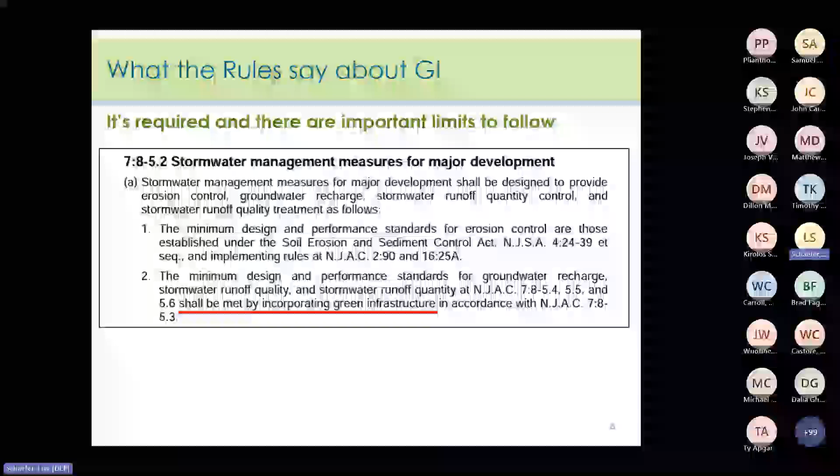All right, so in the rules, we can find the requirement underlined in red on this screen, taken from the rules. All right, the yellow highlighted area right above the red underline. Where is that? Okay, there we go. Says the design and performance standards for groundwater recharge, water quality, and quantity control must be met using GI.

So under item F in this subchapter is where you will find tables 1, 2, and 3, and it is these tables which list BMPs and identify them as either 1, as GI, or 2, as GI requiring a waiver or variance if used for other than quantity control, or 3, as non-GI BMPs. This was covered in Module 1 in our overview presentation. Now, Anthony also touched on this in How to Review a Project Part 1 from Tuesday. The tables have important notes and footnotes that should not be overlooked. And if you need help understanding them, please contact us.

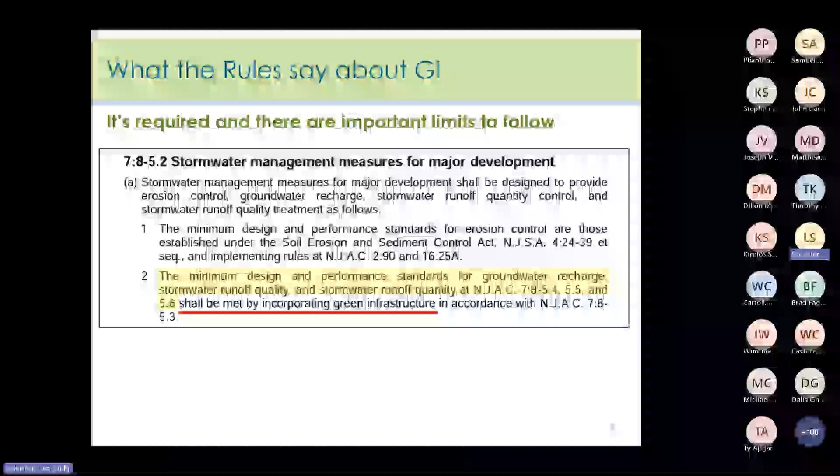So the takeaway from this is that, first of all, the rules require a project meet the design and performance standards using GI. So that means usually Table 1 BMPs will be used as they satisfy all of the requirements. Table 2 BMPs, as we covered earlier, can be used to address stormwater runoff quantity control. When used for the other design and performance standards, Table 2 BMPs require a waiver or variance, and we'll see a refresher on those presented by Manesh in the next presentation. Now, remember, Table 3 BMPs are not GI and therefore will also require a waiver or variance to meet any of the design and performance standards.

So that brings us to the end of item 2 on the slide, which says that GI is to be used in accordance with subchapter 5.3, which I'll discuss next. And it's this section where the rules identify which of the GI BMPs have fixed contributory drainage area limits. Now remember, a contributory drainage area is defined in the rules as the area that drains to a stormwater management measure, excluding the area of the measure itself.

On the fact sheet, below the first paragraph on page 1, these limits are restated. So take note that the GI BMPs found in Chapter 9 of the BMP manual that are not listed here have one or more design components that limit the size of the contributory drainage area. So for example, grass swales have geometric constraints and a maximum depth of flow limitation that is 2 inches. And this design criteria will impact how much of an area can drain to a given grass swale.

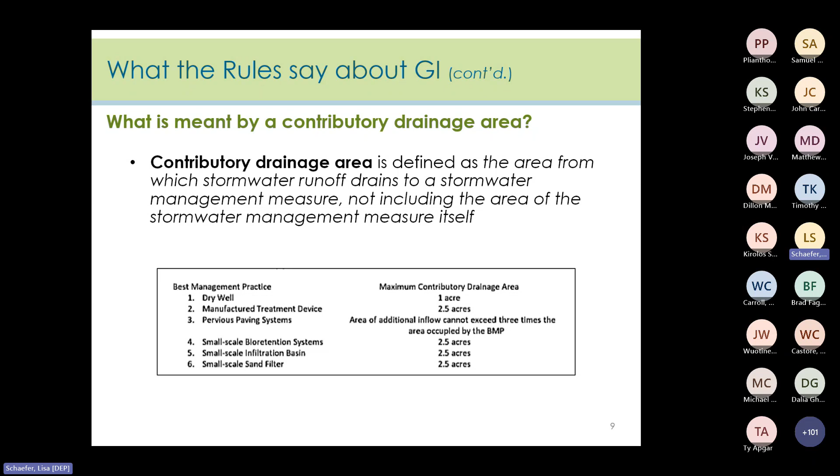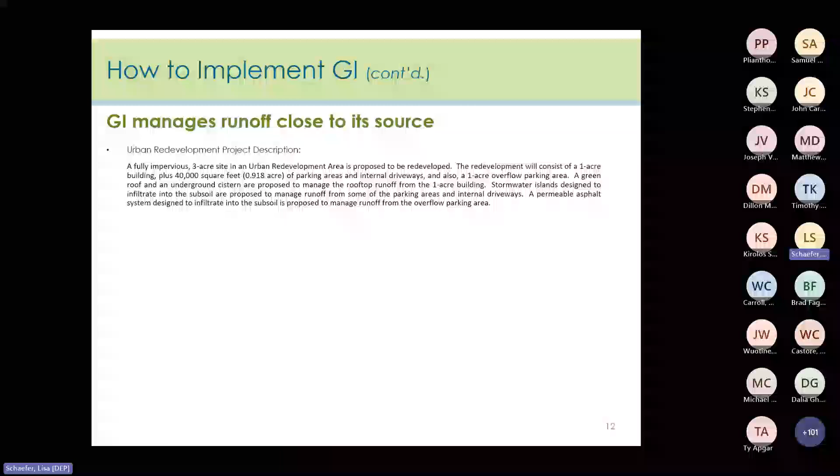Stormwater islands designed to infiltrate into the subsoil are proposed to manage runoff from some of the parking areas and the internal driveways. Also, a permeable asphalt system designed to infiltrate into the subsoil is proposed to manage runoff from the overflow parking area. So here's what that would look like.

The proposed redevelopment is a major development since it disturbs 1 or more acres and therefore is subject to the design and performance standard in the rules. However, because it is an urban redevelopment area and it was previously completely disturbed and was fully impervious, groundwater recharge is not needed. Also, the proposed condition reduces the impervious surface present on the site.

However, due to the proposed GI practices, the project itself breaks up or disconnects the flow of runoff over impervious surfaces and provides low maintenance landscaping that encourages retention and planting of native vegetation and minimizes the use of lawns, fertilizers, and pesticides. So in this example, all stormwater runoff generated by the redevelopment is managed close to its source. So we can answer unequivocally with a yes to the first question on the GI fact sheet.

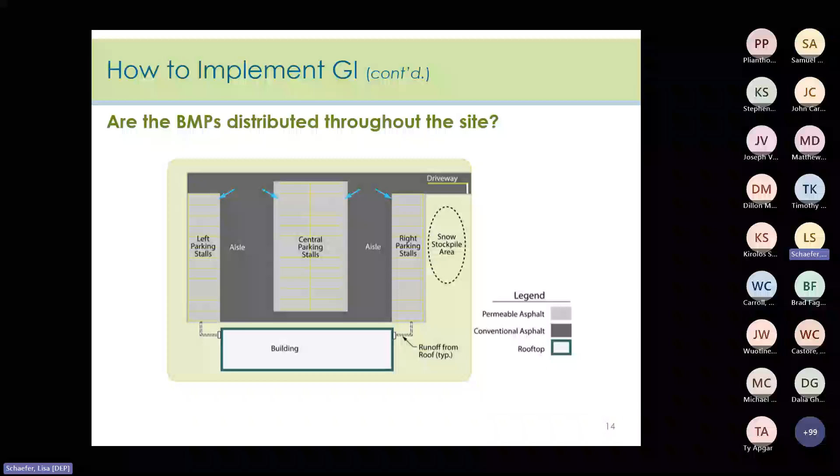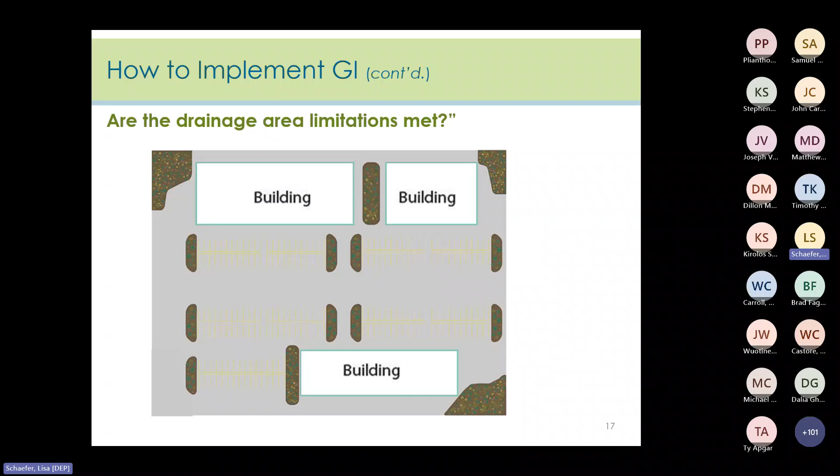So all reviews are going to require figuring out which standards apply and then checking them for compliance. So questions we must ask and answer are, what is the disturbance on site? Does it trigger major development? Will the project be required to do water quantity, groundwater recharge, water quality, and groundwater mounding? We will need to figure out all of that to see if they will apply in this review and how they'll be addressed using green infrastructure as required by the rules.

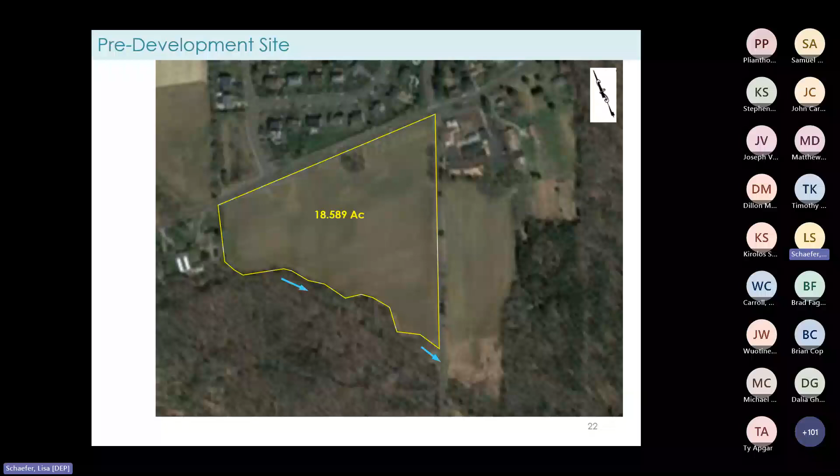The proposed development includes the clearing and grading of the property, construction of 25 single-family homes, widening of the existing road found on the right side of the plan, and another internal roadway. Both roadways will be constructed with 6-inch curbs and will each terminate in a cul-de-sac having a 50-foot radius. The stormwater management report indicated 4.7 acres of impervious cover is proposed, but it didn't have a breakdown dividing it into motor vehicle surface versus rooftop. That breakdown is important with the rule amendments.

I started checking the coverages, and the homes are about 0.35 acres each on average, so that totals up to 8.75 acres. The proposed roadways are 28 feet in width, and by my estimate, that's 70,000 square feet or so, or 1.6 acres of new motor vehicle surface that is proposed. Additionally, the existing portion of the roadway along the east side of the property will be newly collected where no collection system existed before, so it also counts towards the net increase in motor vehicle surface. So clearly these totals exceed the thresholds for major development. So for this project, compliance must be demonstrated with the GI requirement.

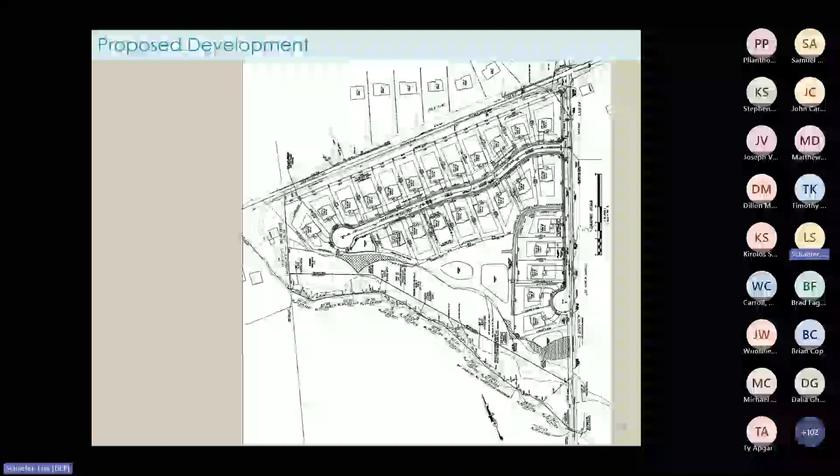We have water quality, stormwater runoff quantity control, groundwater recharge, and if infiltration is proposed, groundwater mounding, plus the safety requirements and of course maintenance. So to address water quality and the GI requirement, 4 small-scale bioretention basins with underdrains are proposed, and here's where they will be located.

But as you know, major development projects are required to use GI best management practices. They are smaller in scale and they treat stormwater runoff close to its source. So it's good that the designers realized the single basin approach would not be compliant, and then they went with multiple BMPs. So the reviewer, of course, would also want to check that for the revised design, the proper number of test pits and soil borings were performed.

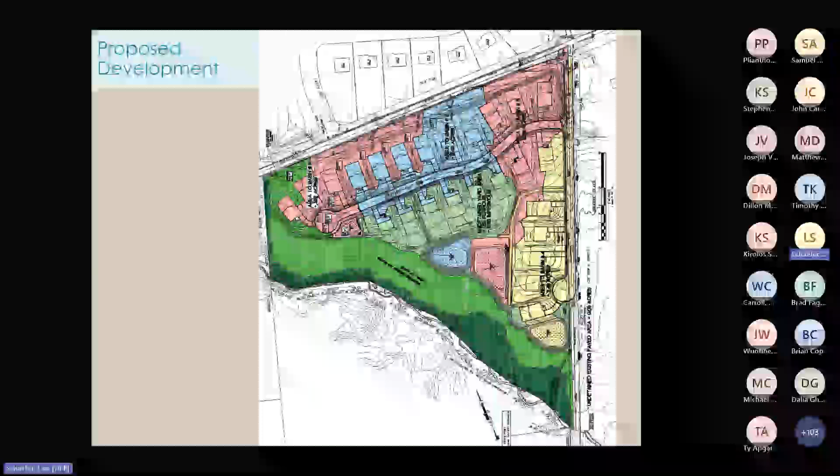So even though the drainage areas are below the contributory limit, none of the BMPs reported as being GI BMPs are close to the source of runoff, nor are they distributed throughout the site. So this layout alone does not meet the GI requirements. Lastly, there's a lighter green area in the center that has roof area generated runoff. It's not detained, so that will be an issue when we address how the site complies with the quantity control design and performance standards. So we know that the design does not meet the requirement to use GI, so we're going to call that strike 1.

Let's take a look at other instances in which the project does not comply with the rules. So here's a basin section detail. The details for each of the BMPs otherwise show most of the requirements for online bioretention systems with underdrains with weirs and orifices to attenuate discharge from the larger design storm. Well, so far, so good.

However, I didn't see the bioretention media specification, so that would definitely be something to add in my review letter. I also didn't see a maintenance plan, so without these 2 items, the BMPs don't merit their TSS removal rating. So that means they don't meet the water quality standard. And this would also go into the review letter, and we'll call that strike 2.

So interestingly, the stormwater calculations that were prepared earlier in 2022 used the Type III storm distribution for the 2, 10, and 100-year design storms. But as per the 2021 publication of Chapter 5, NOAA C and NOAA D distributions are now used.

So that would also go in the review letter and new calculations would be required. So far, it's not looking so good for meeting the runoff quantity control standard. So for now, I'm going to mark that also as non-compliant.

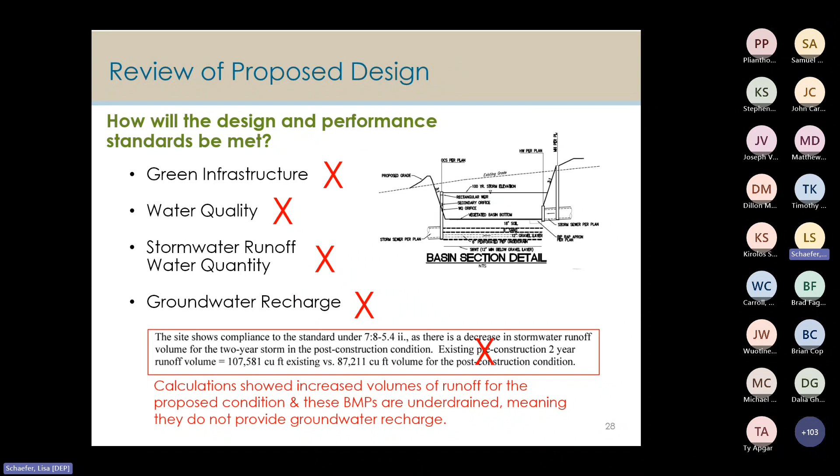So let's see, what did we cover today? We covered what we mean by green infrastructure, which we abbreviate as GI, and that is a stormwater management measure that manages stormwater runoff close to its source by treating stormwater runoff through infiltration into the subsoil, or treating stormwater runoff through filtration by vegetation or soil, or storing stormwater runoff for reuse. The fact sheet was created to help the public better understand GI and how to implement it, along with examples of clustering BMPs that are not considered green infrastructure.

Now, to address water quality, groundwater recharge, and runoff quantity control, the rules require green infrastructure be used, and by that I mean used correctly. So answering 3 questions when you review a design will check if the GI is properly implemented on a site, meaning the GI BMPs are located close to the source of runoff, they are dispersed throughout the site, and the drainage area limitations are met. So I hope that you found the example enlightening, and I hope that you will think about how GI can fit into your particular location.

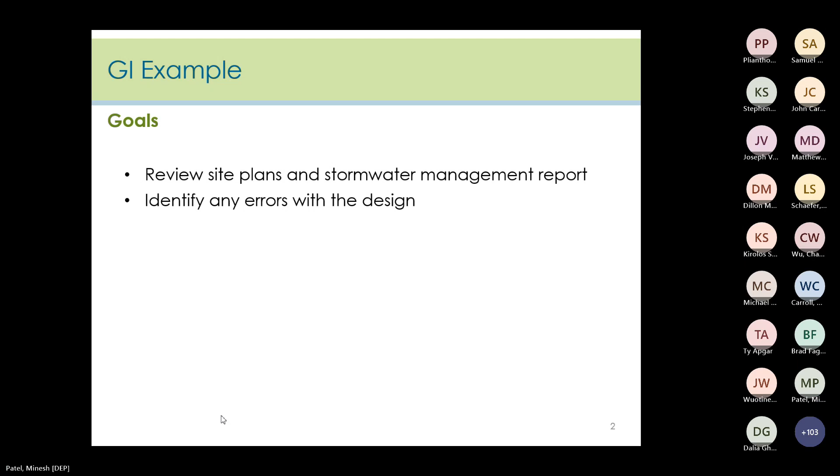We're just going to get right into plan review example number 2. So the goals of this presentation are the same as those for the prior example. We will focus on whether the project meets the requirements for green infrastructure, and we'll look at what was proposed and identify where the design falls short. So let's take a look at what's going on in our example. We'll start with what the site looks like, what the pre-construction conditions are, and what the existing land cover is.

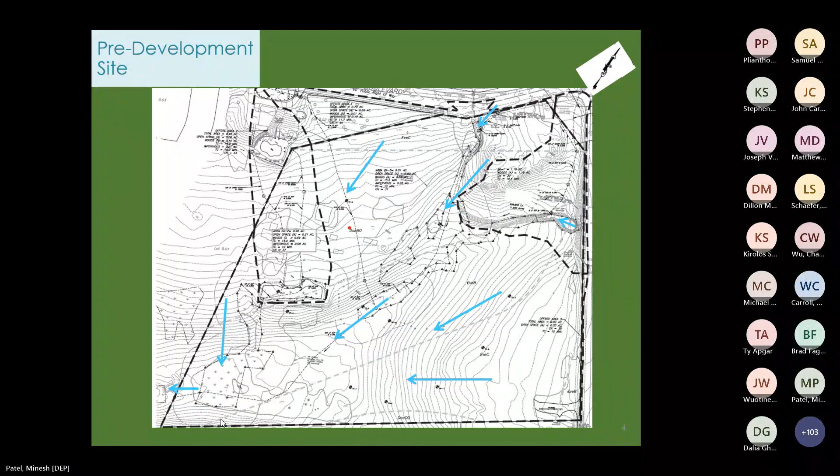The proposed development includes the clearing and grading of the property. There will be a construction of 152 age-restricted affordable housing units in a single multi-story building, a single access driveway, a surface level parking, and multiple stormwater basins that will discharge to the southwest corner of the property to support the existing drainage patterns. The project will be constructed in 2 phases.

The first will include 84 units, and the second will be 68 units, which are located on the left side of the building as shown. From the stormwater management report, the narrative states there are 3 small-scale infiltration basins along the southern border that are designed to provide extended detention of the larger storm designs, plus a northeast detention basin for the off-site runoff entering the site to the north and east.

So immediately there's a big issue with this design. All 3 of the basins that are proposed to meet the green infrastructure requirement, they're all grouped at the southern side of the project. So clustering these BMPs together is not compliant with the green infrastructure requirement. Remember, the BMPs have to be distributed throughout the site and manage stormwater close to its source. The proposed design is going to rely upon infiltration of runoff to meet the groundwater recharge requirement and water quality.

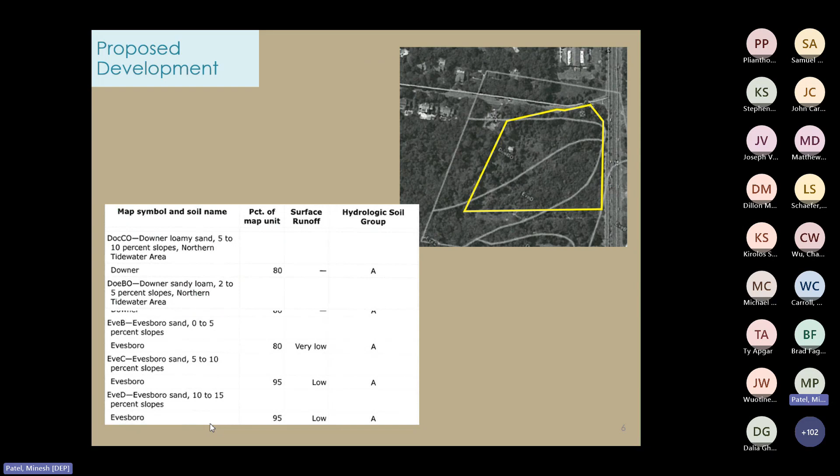Let's look at the web soil survey next, followed by the soil testing data before we evaluate the overall design a little further. So as you see here from the soil survey, the site is mapped as HSG A, which is promising for infiltration. So let's look at the soil testing findings next. 2 sets of soil investigations were conducted. A total of 20 test pits were performed. The first group, shown in green, are from April 2021, and the second group, shown in blue, are from January 2022.

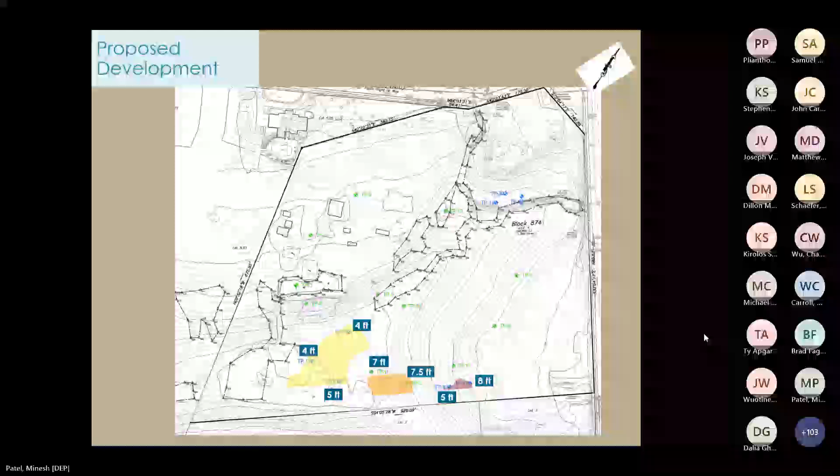So I've superimposed the 3 proposed small-scale infiltration basins onto the soil testing map just to show which test pits correspond to the respective basins. Your review would also include a check of whether a sufficient number of test pits and soil borings were performed, along with the depth of the investigation, which I'm not going to be covering here because we're really going to be focusing on the green infrastructure aspect. I've also added the depth at which the logs show the soil permeability was determined, taking note that groundwater was not encountered at any of these locations.

The brown shaded rectangles denote results for other test pits, and for test pit number 3 and 5, groundwater was encountered at 5.5 feet below existing grade. For test pit 6, groundwater was encountered at 6 feet below grade. And lastly, a perched water table was found for test pit 8 at 10 feet below grade. As with the blue shaded test pits, groundwater was not encountered at the ones that I did not call out. So the report shows quite a variation in the test results for permeability. So let's look at the table of the testing results.

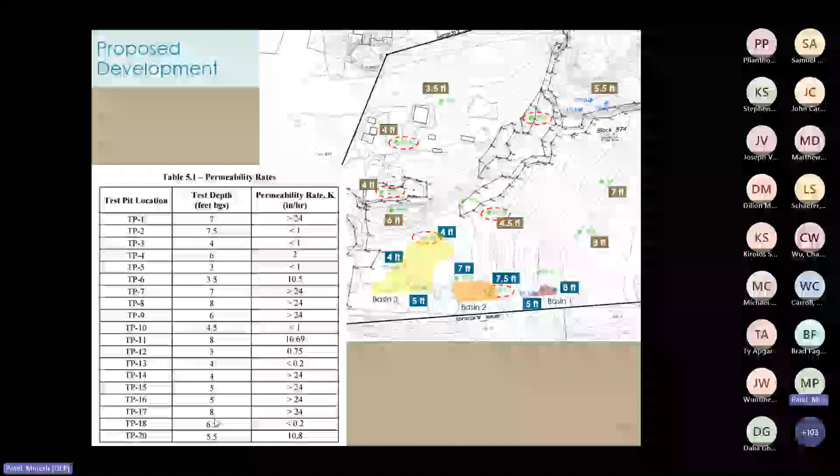So here's that table, and I've circled the locations where the field tested permeabilities were less than 1 inch per hour. Unless soil replacement is proposed, these locations are not really suitable for infiltration types of BMPs. So given the low permeabilities at the encircled test pits, we will have a problem with the ability of the orange and yellow shaded basins to drain properly, and we'll add this to the review letter. So next, let's look at information found in the stormwater report, which states the 3 basins are designed as small-scale infiltration basins, but we really have to check if they are.

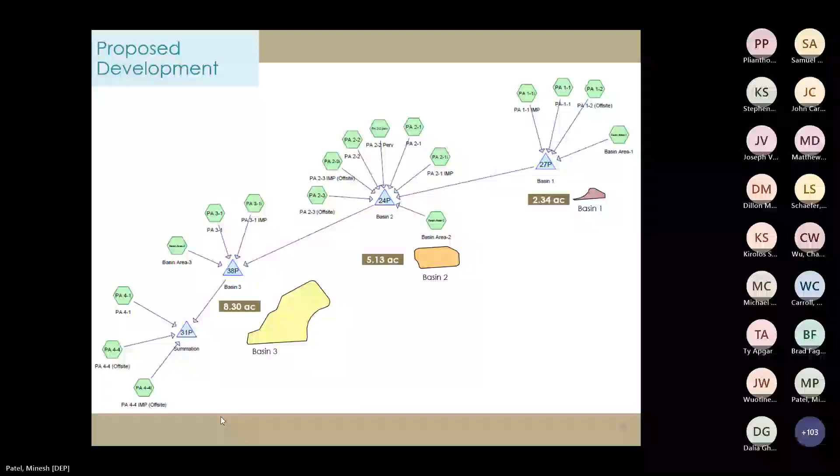So before we dive into the construction details, I just want to say that I'm not including further review information for quantity control and groundwater recharge. For the required groundwater mounding analysis for infiltration BMPs, the only analysis was for basin 1, and the most restrictive hydraulic conductivity with the factor of safety was not used in the calculations. So this could also be in the review letter.

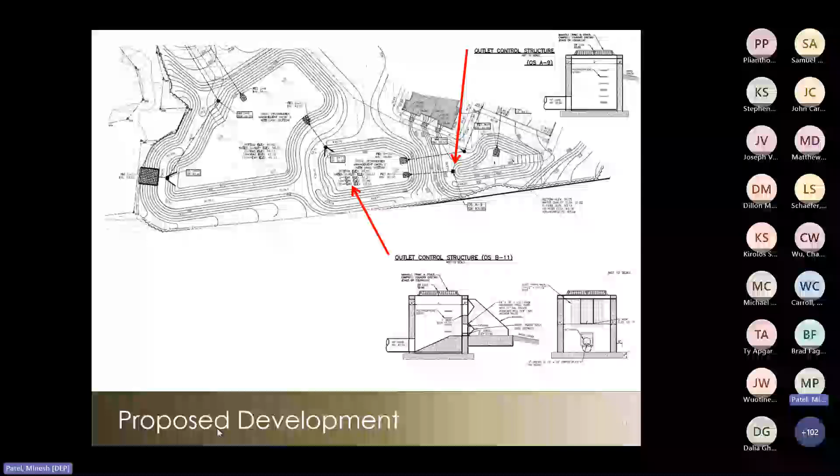And if you look at the detail, the lowest orifice has an invert of 50, which is below the water surface elevation of the water quality design storm that's contributory to basin 2. So basin 2 wouldn't meet the design criteria for infiltration basins according to our BMP manual. And then similarly, the lowest orifice at OS C-10 is below the water surface elevation of the water quality design storm.

So in conclusion, basins 2 and 3 do not meet the design criteria for infiltration basins according to the BMP manual and will not merit the 80% TSS removal rating. These contributory drainage areas would most likely be larger than the ones that you would find in Table 5.1. They would then be more suited for those in Table 5.3, which would require a variance before they can be used for quality and recharge.

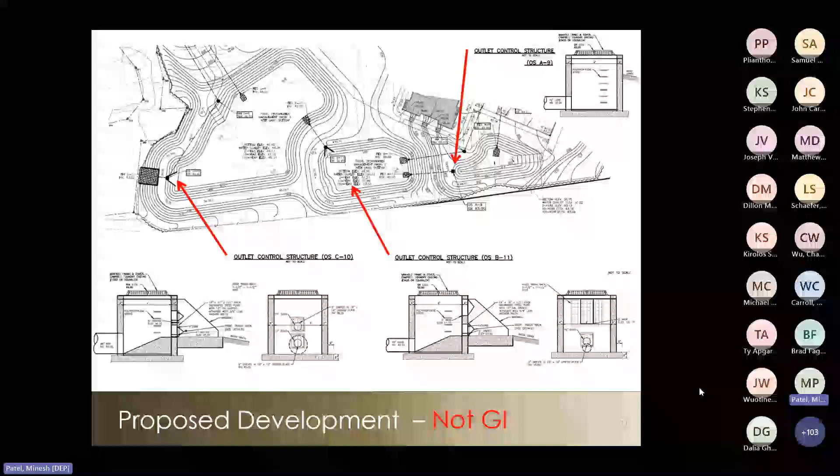Waivers are for the enlargement of an existing public roadway or railroad or the construction or expansion of a public pedestrian access, which this project is not. So the next slide will revisit the subject of variances. There are strict standards to be met in order to grant a variance, as we've discussed. More specifically, the municipality has to have a mitigation plan in place that identifies what measures are necessary, potential mitigation projects, and/or criteria to evaluate mitigation projects that can be used to offset the deficit created by granting a variance.

Additionally, the conditions that are shown here, in part from the rules, must be met. The applicant has to demonstrate it is technically impracticable to meet one or more design and performance standards on site. And those reasons can only be engineering, environmental, or safety-based. Furthermore, the variance cannot be for the entire site unless an analysis is provided for each drainage area within the site. The applicant also has to demonstrate maximum possible compliance is provided by the design. Don't forget, there's also a reporting requirement for variances.

What's not shown in this excerpt is item 3, which is about the mitigation plan, which has to be within the same HUC 14 and approved no later than the preliminary or final site plan of the project. Moreover, if the variance is for green infrastructure, then the mitigation plan must use green infrastructure BMPs to manage an equivalent or greater area of motor vehicle surface. There are 7 other parts to the mitigation plan from this section of the rules that I've not covered here. But in short, a municipality cannot grant a variance now like it may have done in the past. Since information was also not provided on mitigation projects, this project is not compliant with the rules.

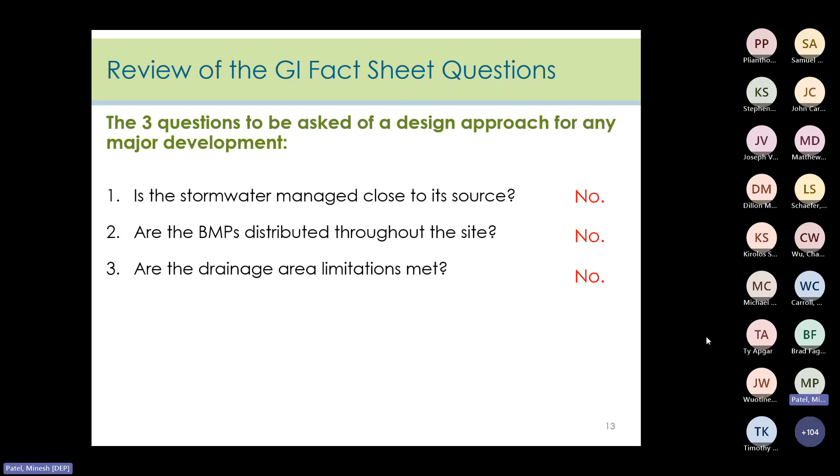So to wrap things up, this project does not comply with the requirements to use green infrastructure to meet the design and performance standards for water quality, groundwater recharge, and stormwater runoff quantity control.

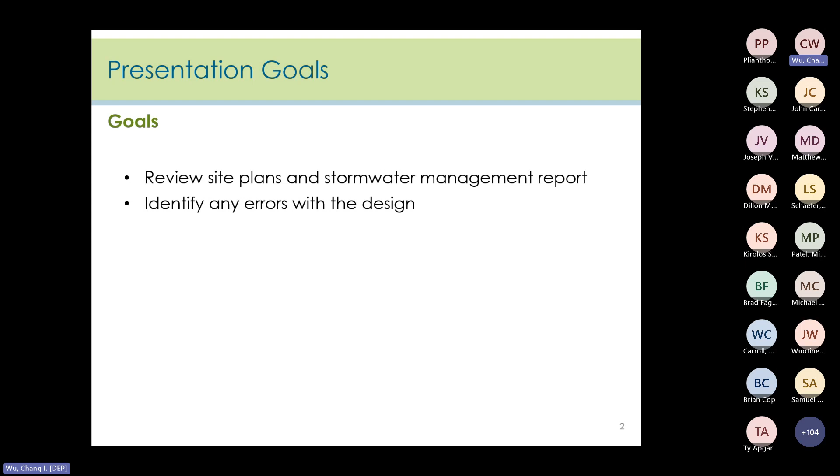Good afternoon, everyone. This is Chang Wu. I'm going to present the third example from the project that we saw in our MS4 audit program. So the goal of the review for stormwater management project is to review the site plan and the stormwater management report, and also identify any errors with the design.

So first thing to ask is, is this project a major development or not a major development? So you have to look into the municipality's stormwater control ordinance. And for this project, the municipality adopted the SCO pursuant to the stormwater management rule adopted on March 2nd, 2020, which is what we call the GI rules.

And under the GI rules, the definition of major development is a disturbance of 1 or more acres of land, or an increase of a quarter acre of regulated impervious surface, or regulated motor vehicle surface. So in order to check the disturbance, the increased regulated motor vehicle surface and the regulated impervious surface, we need to check the land covers of the pre-construction condition and the proposed conditions and the scope of disturbance.

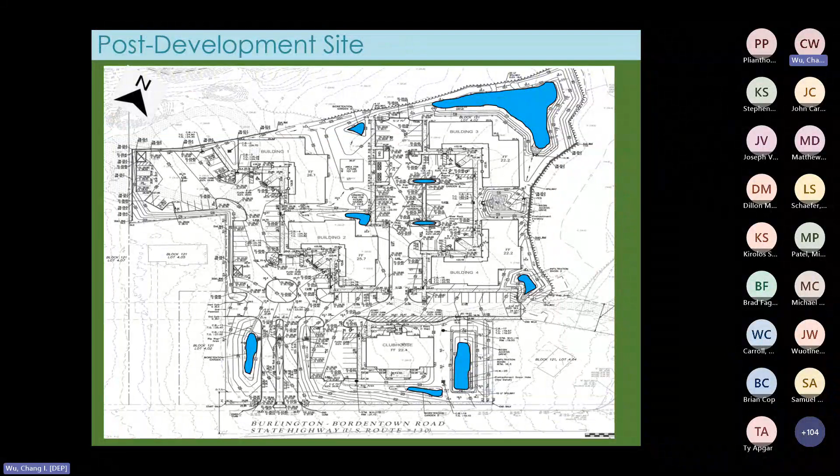So let's take a look at the site plan. You can see that it's a development that has a lot of disturbance and also impervious and motor vehicle surface. So let's take a look at the existing conditions. For the existing conditions, we have to check the 5 years from the day they submit the application and see whether within the 5 years there's a land cover change, whether there's a land cover that would have the least potential to generate runoff.

This project was submitted in 2021. So we look back, there's an aerial photo available in 2015, and from the aerial photos, we can see that there's no land cover change during the past 5 years. So we can assume that the land cover shown on the site plan survey and also on the aerial photos shows the project site. The major land cover is wooded area and has some impervious surface.

So compare the pre and the post construction condition. We definitely know that this project would disturb more than 1 acre, and also would have more than a quarter acre of regulated motor vehicle surface and regulated impervious surface. So this project meets the definition of major development.

So when a project is a major development, we have to look into the standards. The first one is water quantity. So definitely this project needs to meet the water quantity standards. The second one is water quality. You can see that the project has an increase in regulated motor vehicle surface greater than a quarter acre, so it is required. And since the project has a huge coverage of impervious surface, definitely groundwater recharge is required.

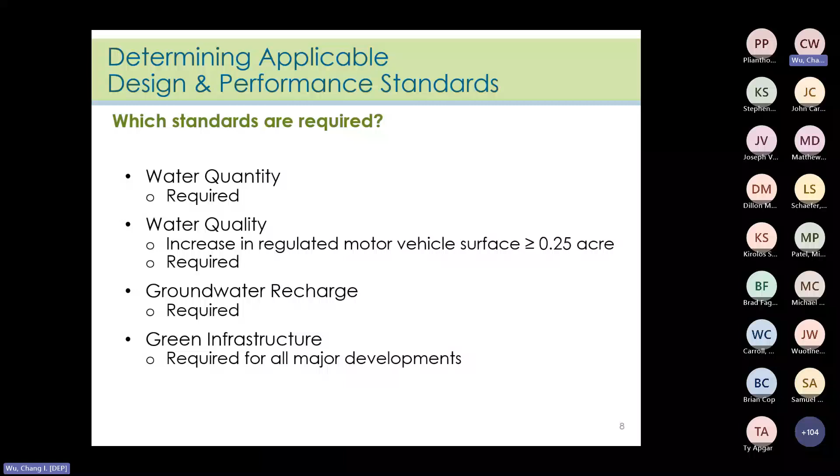In accordance with the rules and our SCO, GI BMPs are required unless a variance from strict compliance with the SCO is granted. Especially, small-scale GI BMPs have to be incorporated to comply with the stormwater runoff quality and groundwater recharge design. We can see that infiltration 4 has a contributory drainage area greater than 2.5 acres. So infiltration 4 is not a small-scale GI BMP. So this project does not meet the GI rules.

And next one, we want to look at whether the proposed GI BMP is close to its source. You can see that from the site plan, the blue highlighted area is the proposed GI BMPs. But you can see that on the upper left corner, the area has substantial impervious surface and motor vehicle surface, but there's no proposed small-scale GI BMP allocated on the area.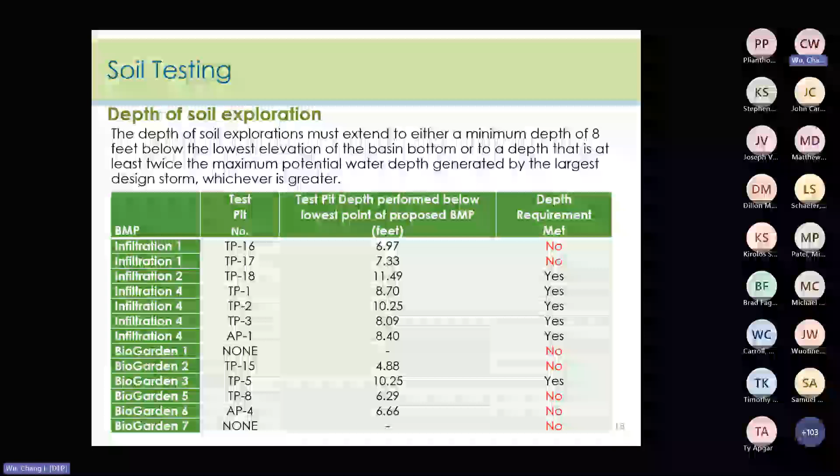After we review the number of soil explorations and also the locations of the soil testing, the next topic to discuss in the soil testing is the depth of the soil exploration, whether it meets the depth requirements. I think you already learned about the depth, so I'm not going to repeat it. And from our review, there are a couple of soil explorations that don't meet the depth requirements.

The next topic to review is the saturated soil hydraulic conductivity rate testing and also the seasonal high water table. So here's one example. We do see they have the soil profile pit, the soil profile log, and also the description of the soil morphology in the submitted soil report. So here are two examples.

One example is infiltration 4, where they identified the redoximorphic features at 32 inches below the ground level, and also a water table was encountered at 50 inches below the ground level. Since the seasonal high water table is higher than the observed water table, 32 inches below the ground is recognized as the depth of the seasonal high water table.

So this seasonal high water table will be used to check whether there is sufficient separation of the seasonal high water table from the lowest point of the BMP. As shown in the detailed site plan, the profile of the BMP, you can see that it has sufficient seasonal high water table separation.

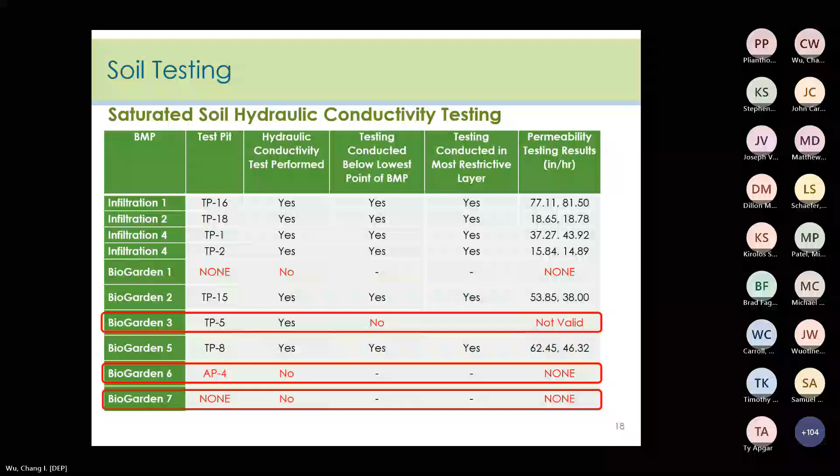After we review the soil information, we understand what the site looks like. Next we move to whether the site meets the water quantity requirements. The first thing to check is whether the routing calculation uses the correct rainfall distribution, rainfall depth, and dimensionless unit hydrograph. This site is located in the coastal plain and in region C of the NOAA rainfall distribution, so the rainfall distribution should use type C, and the DUH should use the Delmarva. For rainfall depth, they used the county average 24-hour rainfall. That's acceptable.

Since this project was submitted to the township, and the township adopted ordinance only includes the rule amendments up to March 3rd, 2020, this project doesn't have to use the projected future rainfall in the design, as the current rule requires.

In the quantity standard review, we check whether the CN number is correct. In this case, the design report used HSG B in the routing calculation, which is wrong, and that affects the selection of the CN number. The default HSG A soil should be used, so the CN number should be chosen from A soil. For post-construction, the default soil should be D soil, so the CN number should be chosen from D soil.

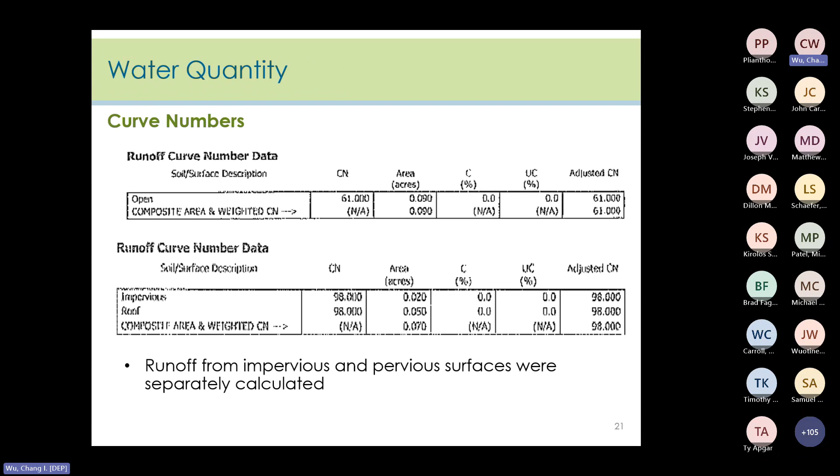So we take a look at the aerial photos and the proposed site plan. We can see that, yeah, bioretention basin one will take the runoff from pervious land cover, so the assumption of T sub C is correct.

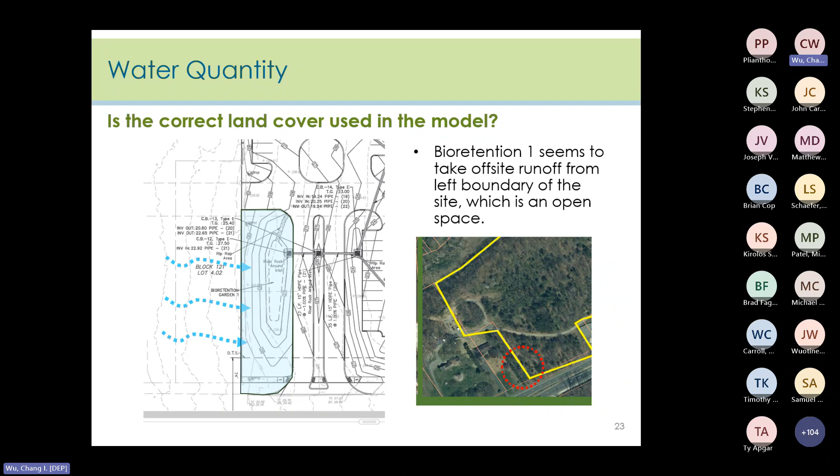And another thing we want to check is the water quantity. For the exfiltration, if they use exfiltration in their routing calculation, use of exfiltration in a small-scale GI BMP is allowed, but subject to some conditions. So here is a brief of the conditions. Exfiltration can be used in small-scale GI BMPs only if the soil testing fully complies with Chapter 12. The design of the BMP must comply with all the criteria in Chapter 9.

Pre-treatment is required for contributory drainage area greater than 1 acre. Exfiltration cannot be used in any BMP design with an underdrain system. So let's take a look at one example of this. Sorry, there's a typo on the slide. If you have the handout, the drainage area in the handout is 2.71 acres. Actually, it should be 2.17. So let's take a look.

Infiltration 1, the soil testing, as we saw from the soil report, is valid. And the drainage area is 2.17 acres, so pre-treatment is required. And we can see that they do have a pre-treatment. And this infiltration 1 infiltrates into subsoil. So exfiltration for this proposed infiltration 1 can be used in the routing calculation.

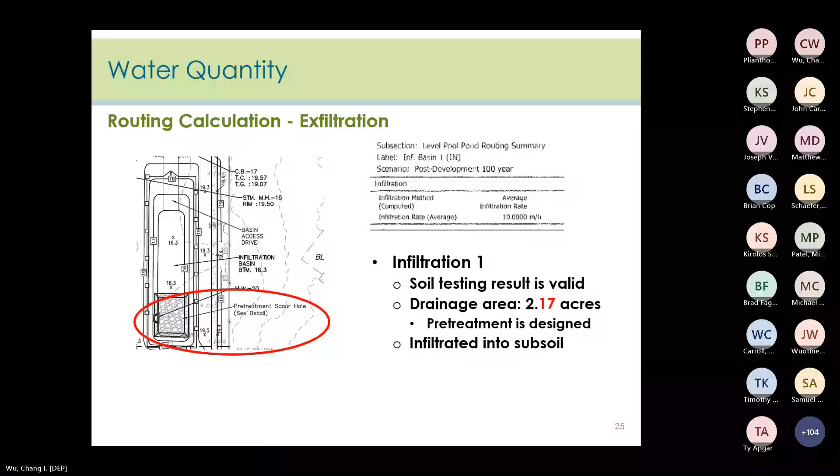And also we reviewed all the other proposed BMPs, and we found some issues. Here is a summary of those issues. Infiltration 4 is not a small-scale GI BMP because it exceeds 2.5 acres of drainage area, so it cannot use exfiltration in the routing calculation. Bio gardens 1, 3, 6, 7 do not have valid permeability test results, so they cannot use exfiltration in the routing.

And because they cannot use the exfiltration, the volume and the water level would have to be revised. So the outlet, everything, should be adjusted based on the routing calculation without exfiltration. Or alternatively, they can go back to do soil testing, get valid soil results, and also modify the drainage area so they can continue to use exfiltration in the routing calculation.

And the other issue, also associated with the soil, is that the routing calculations are based on HSG B soil where the soil is urban land cover without any HSG designation. So the default HSG A soil in the pre-construction and default D soil in the post-construction should be used. As we said in the previous slide, that would overestimate the pre-construction peak flow rate and underestimate the post-construction peak flow rate. So the table we found in the report saying that they meet the reduction requirement would be questionable. If you have a situation like this in your review, you should ask the design engineer to revise the report and do the reduction rate calculation again.

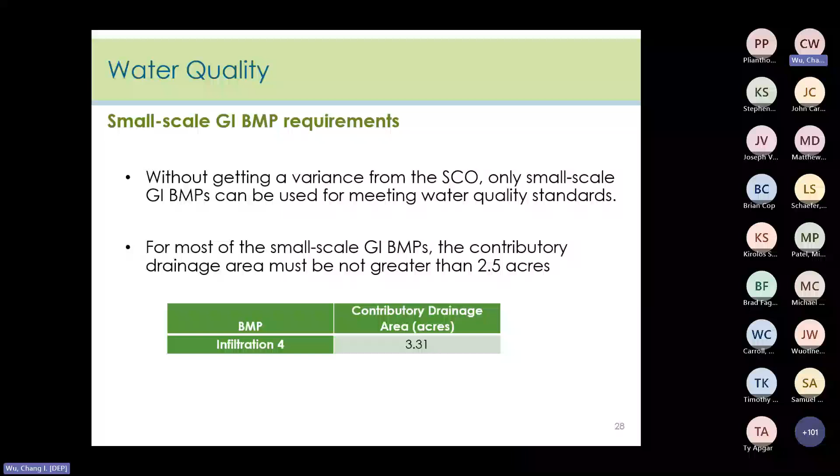And the second issue we want to address is that the proposed water quality BMP should treat the entire water quality design storm runoff in the BMP. That's in our rules and also in the township SCO. So let's take a look at their proposed BMP. Here, it may not be that obvious to you, but from our review, it shows that bio gardens 6 and 7 do not contain the water quality runoff volume.

And also, we want to check the BMP design, whether the configuration of the proposed BMPs meets the design criteria in our BMP Chapter 9. As the previous slide shows, there are some BMPs that do not have valid soil exploration to determine the seasonal high water table and the saturated soil hydraulic conductivity rate. So the separation from the water table and the drain time may not be verified.

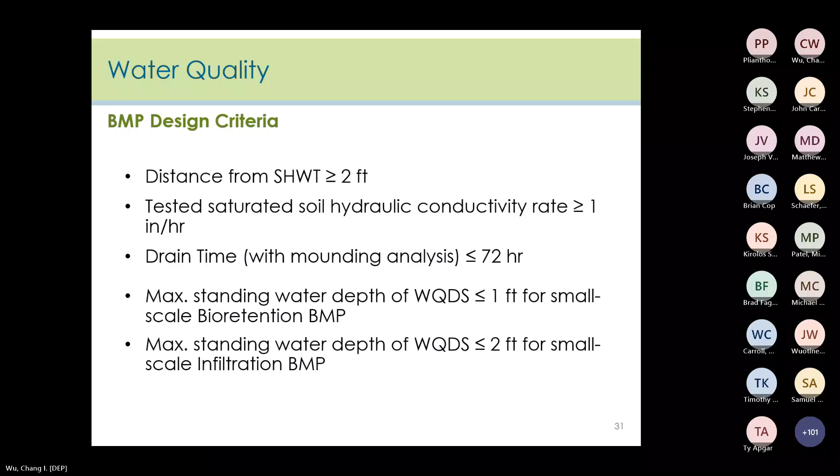And also, for the bioretention system, there are requirements for the soil bed, for the media, and also here's a requirement from the BMP. So you will take a look at the profile view of the site plan to see whether the site plan does show those requirements for the planting bed. And for this project, it does show that.

Then for the infiltration BMP, the soil layer also has requirements. So same thing, you have to check the detailed drawing of the profile of each proposed infiltration BMP, and check whether they have those notations in the notes in the site plan that meet the requirements.

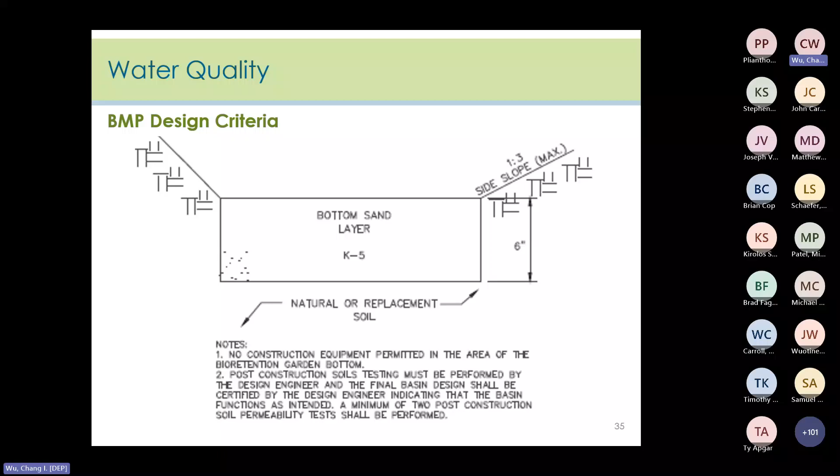And also here are the screenshots from the site plan. They do mention the construction without compaction, and all those requirements required in the design criteria from Chapter 9. So those are the details you want to review when you examine the site plan.

After the quantity, the next topic to be reviewed is the groundwater recharge. This project proposed to infiltrate the difference of the 2-year storm. Although it's simple, from the soil testing we know that they did not use the correct hydrologic soil group in the design. So the volume would not be correct. So they will have to correct the report, use the corrected HSG to calculate the volume, and revise the report accordingly.

And because those proposed BMPs infiltrate runoff into subsoil, groundwater mounding analysis is required. So here are the screenshots from their report with those numbers. Their estimate of the mounding height is 4.637 feet. And on the right-hand side are the highlights of their input. So we would also like to review whether those inputs are correct.

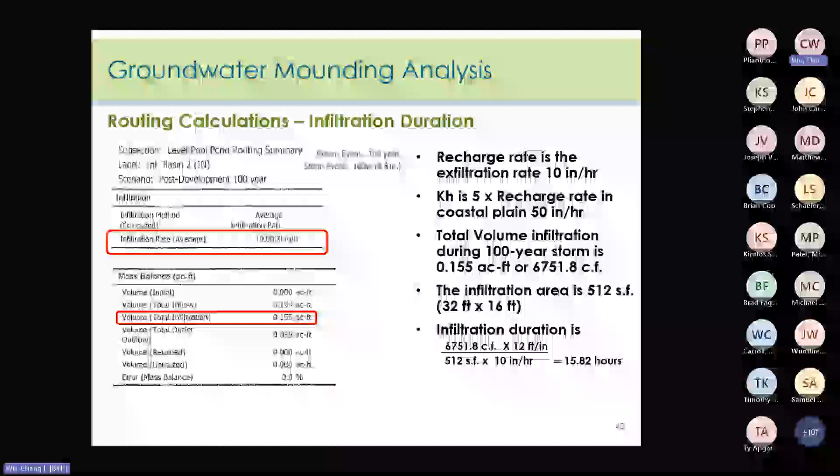And the total volume infiltrated during the 100-year storm is 0.155 acre-feet. So from that, you can calculate the infiltration duration, and it should be 15.82 hours. So those numbers are not the stated input. So we ran the Hantush spreadsheet and found that the correct mounding height should be 3.542 feet.

So using that number, we go back to compare with the groundwater table, and in the profile view of the proposed BMP, we found the mounding height is higher than the basin bottom of infiltration basin 2, for example. So they may adjust the recharge rate down to 0.5 inch per hour, and also within 72 hours, and see whether the height will be lower. If that's lower than the basin bottom, that will be fine.

But one issue, again, is that the hydrologic soil group is not correctly assigned in the calculation. So the runoff volume in the post-construction condition is underestimated. So in the routing, the volume to be infiltrated or exfiltrated is less than what it should be. So they may have to correct the errors, rerun the routing, and do the groundwater mounding analysis again.

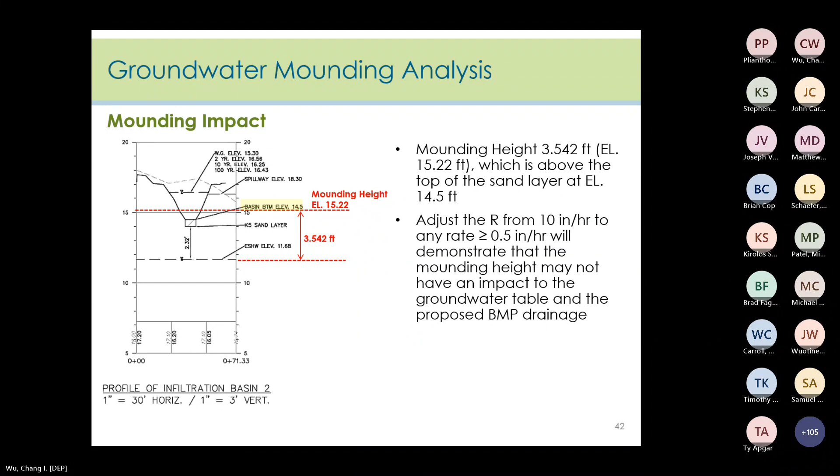After reviewing those performance and design standards, we have to review the maintenance plan. And here are the screenshots of the maintenance plan. They have the restriction, they have the responsible parties designation, and have those logs for the inspection and also maintenance work.

But we found that their maintenance plan does not have the cost estimate, which is required by the rules. And also the maintenance plan has to be recorded on the deed, but we did not see that record from the township.

So a summary of this project after our review is that for the soil, they did not use the correct default soil when there's urban land in the soil survey, they don't have sufficient soil exploration and sufficient depth, and they did not have a sufficient saturated soil hydraulic conductivity rate.

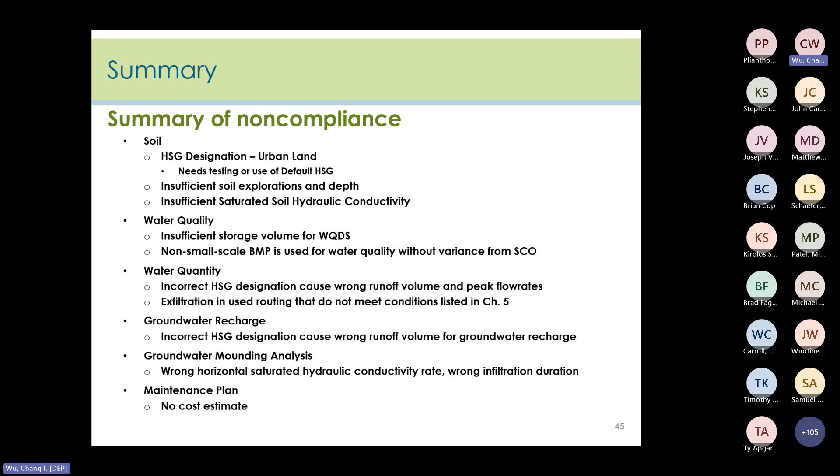So here is one quick review of the project we encountered during the audit program. If you have questions, please contact me.

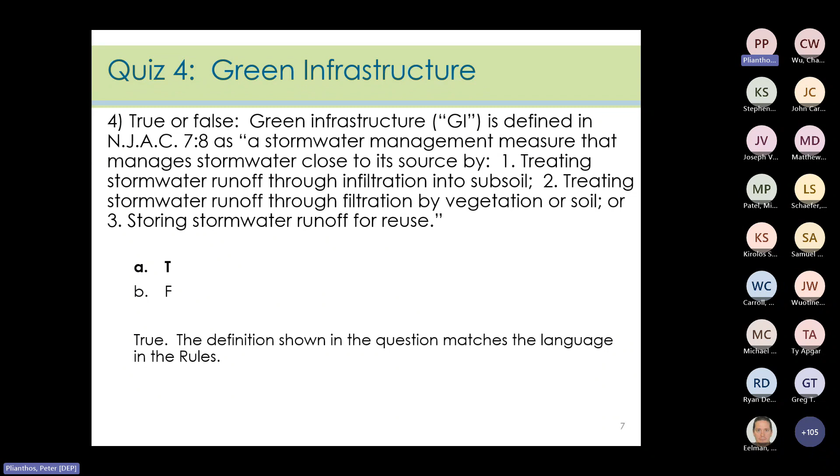Question 5. Which questions need to be answered yes when designing a major development to meet the GI requirements? Correct answer is all of the above. So, as found in the GI fact sheet, the stormwater must be managed close to its source, the BMPs must be distributed throughout the site, and the drainage area limitations, as applicable, must be met when designing a major development to meet the GI standards.

Number 6. Which of the following GI BMPs has a contributory drainage area limit that is other than 2.5 acres? The correct answer is dry wells. Dry wells have a 1 acre contributory drainage area limit per NJAC 7:8-5.3(b). This information was also in the slides from the GI fact sheet presentation.

Number 7. Unless a variance is granted, which of the following BMPs cannot be used to meet the quantity control requirement? And the answer is extended detention basins from Chapter 11.2 of the BMP Manual. In accordance with NJAC 7:8-5.2, extended detention basins cannot be used unless a variance is granted. The presentation for example 2, specifically slide 12, included the information on what must be in place for a municipality to grant a variance from the GI requirements.

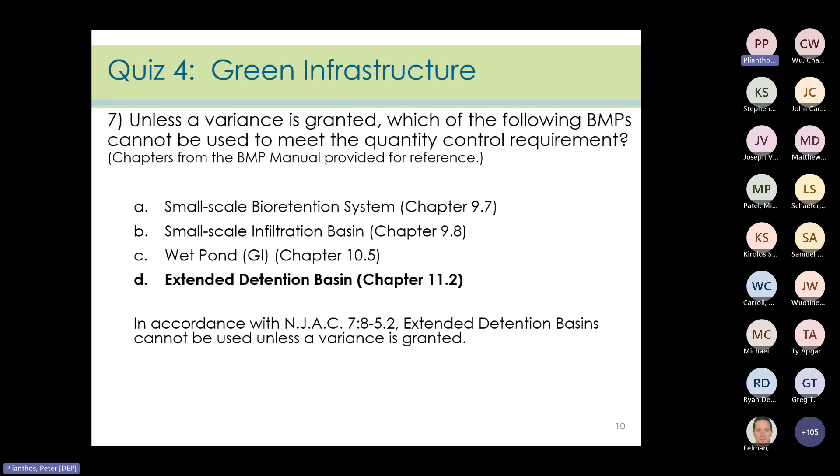Question 8, yes or no? Can GI BMPs be located near one another for the following scenario? There are 7 dry wells located adjacently on 3 sides of a large building. No more than 1 acre of roof runoff is directed to each individual dry well, and each dry well will function individually for the water quality and recharge storms.

And the answer is yes. This material is covered on slide 13 of the GI fact sheet presentation from earlier today, and you can find more information about this setup on the GI fact sheet itself. The important factor here is making sure the answers to the 3 questions for GI are yes.

Number 9. Which of the following is recognized as a co-benefit of using green infrastructure? And the answer is all of the above. As described on pages 1 and 2 of the green infrastructure fact sheet, all 3 of these are environmental, social, and economic co-benefits of using green infrastructure. Additional co-benefits include increased property values and the removal of pollutants from the air through greater utilization of vegetation.

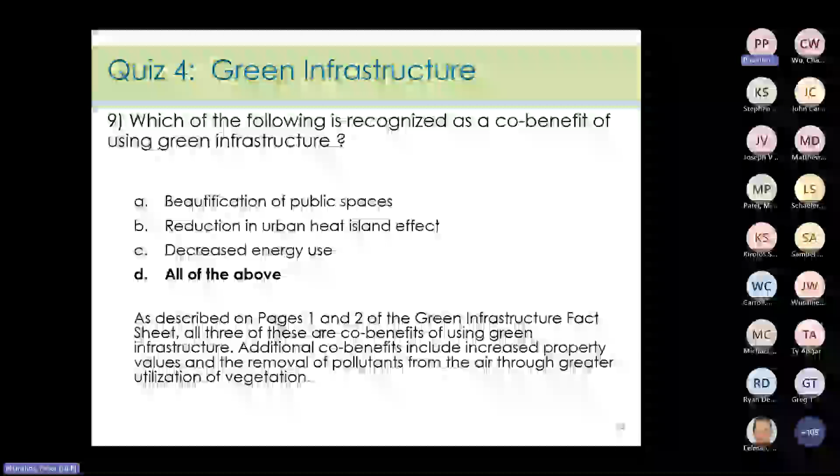Question 10, yes or no? Is the interconnection between GI BMPs in the following scenario acceptable? A small-scale bioretention system infiltrates runoff for the water quality and groundwater recharge storm events, meeting the 2.5 acre contributory drainage area limitation. The 2, 10, and 100-year storm events are discharged from the small-scale bioretention system to a large-scale infiltration basin, which is used only for water quantity.

And the answer to this is yes. From NJAC 7:8-5.2, the downstream large-scale infiltration basin can only be used to meet the quantity control requirement and is not subject to the contributory drainage area limitations found in NJAC 7:8-5.3(b). Additionally, the upstream small-scale bioretention system fully infiltrates the water quality design storm and the recharge storm.

Number 11. Which of these can be used to demonstrate compliance with the water quantity design and performance standard? And the answer is B. Design stormwater management measures so that the post-construction peak runoff rates for the current and projected 2, 10, and 100-year storm events are 50, 75, and 80% respectively of the pre-construction peak runoff rates.

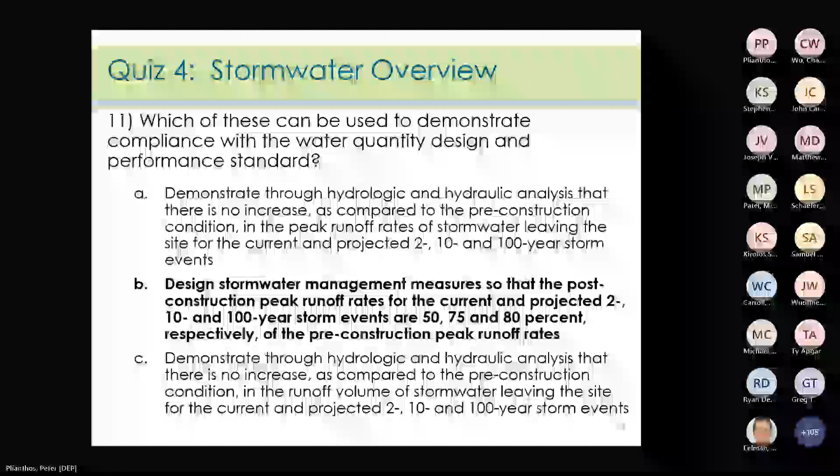Question 12, true or false? BMPs from Table 5-2 can be used to meet stormwater quality requirements without obtaining a waiver or variance from NJAC 7:8-5.3. This statement is false. BMPs from Table 5-2 can be used for stormwater runoff quantity only. For them to be used for stormwater runoff quality, a waiver or variance from 7:8-5.3 must be obtained.

Number 13, yes or no? Can the Delmarva dimensionless unit hydrograph be used for the redevelopment of a 2-acre entirely impervious site located within the coastal plain? And the answer is no.

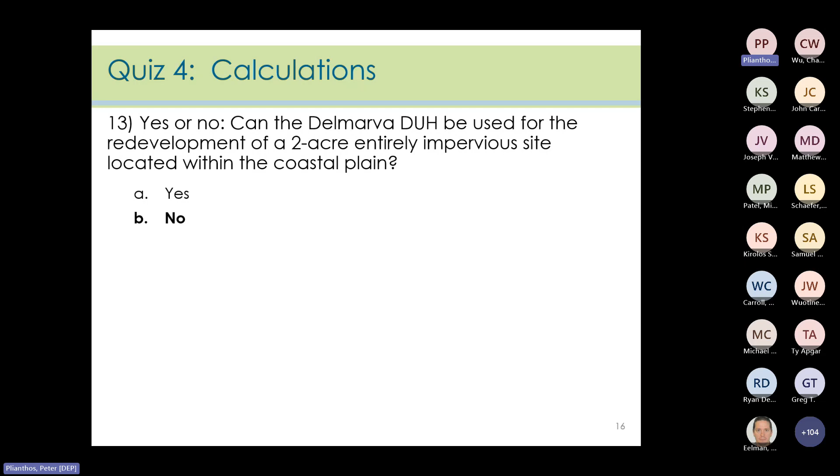The Delmarva dimensionless unit hydrograph must be used when modeling watersheds within the coastal plain region of New Jersey, with just a few exceptions. It cannot be used to size a manufactured treatment device, or MTD, as it may underestimate the peak flow rate entering the MTD. And for an entirely paved site, the significant surface storage associated with the coastal plain is no longer present, also resulting in underestimated peak flow rates if the Delmarva is used.

Additionally, the Delmarva should only be used in areas that have an average watershed slope less than 5%. If any of these situations are proven to be present, the SCS standard dimensionless unit hydrograph must be used. Also, a side note on this subject, if the Delmarva is used in the pre-construction condition, it must also be used in the post-construction condition. Same idea goes for the SCS.

Question 14. When determining the curve numbers for site design, the design engineer should assume that the condition of the existing cover is, correct answer is good condition. Pre-construction condition curve numbers should assume that vegetated areas are in good condition.

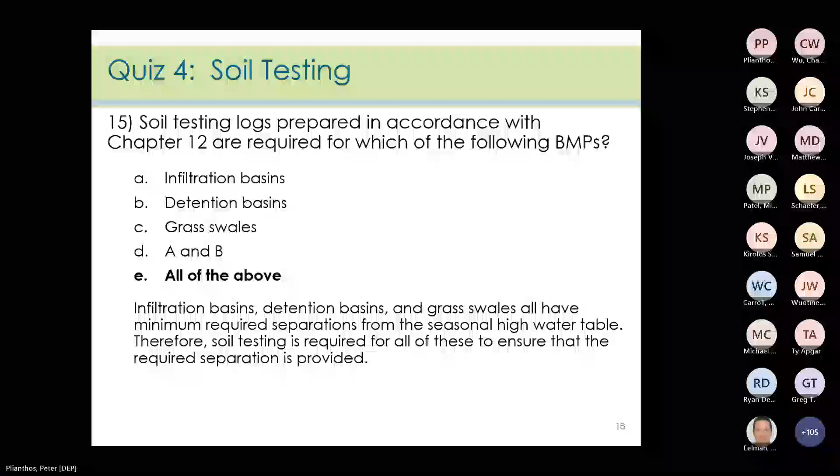Question 16. What is required as part of the municipal stormwater management plan to grant variances or exemptions from the design and performance standards? And the right answer is C, mitigation plan. A municipality must have an approved mitigation plan as part of its municipal stormwater management plan to grant variances or exemptions from the design and performance standards.

Question 17. Can an infiltration basin be designed with a perforated underdrain pipe as a means of discharging runoff from the basin? And the answer is no. An infiltration BMP cannot have an underdrain pipe if it wants to meet the criteria for an infiltration basin in the BMP manual.

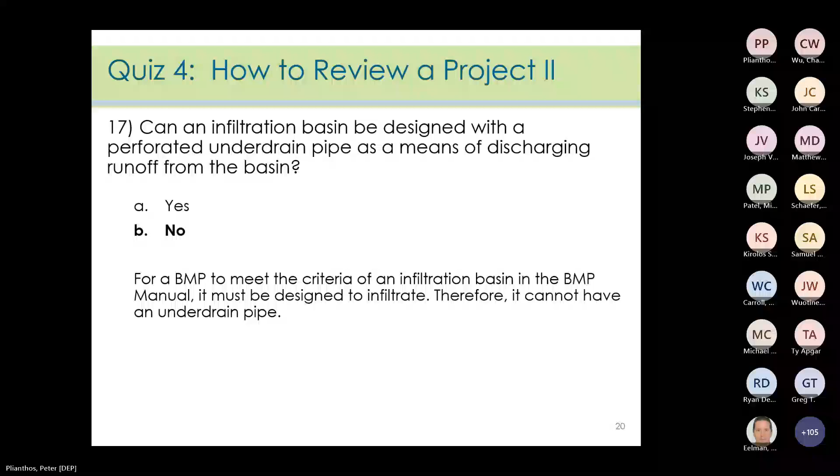Question 18. Under the rules adopted on July 17, 2023, which of the following meets the groundwater recharge requirements? And the correct answer is D. The rules adopted on July 17, 2023 allow two options to meet this requirement. One is maintaining 100% of the average annual pre-construction groundwater recharge volume for the site. That option of meeting the requirement hasn't changed under the amended rules.

The second option is to infiltrate the increase of stormwater runoff volume from pre-construction to post-construction for the projected 2-year storm. So the change under the newly adopted rules is that the storm event used under this option is the projected 2-year storm.

Number 19, true or false? Under the rules adopted on July 17, 2023, the storm events used to meet the stormwater quantity standards shall consist of the current and projected 2, 10, and 100-year storm events as defined and determined pursuant to N.J.A.C. 7:8-5.7(c) and (d), respectively. And the answer is true. Under the rules adopted on July 17, 2023, both the current and projected design storm events are required to be used in the design of stormwater management BMPs to meet the stormwater runoff quantity control requirement.

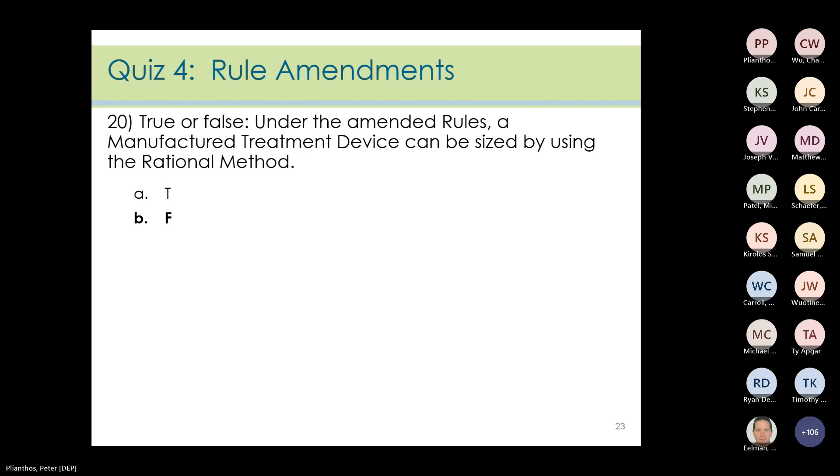Number 20, true or false? Under the amended rules, a manufactured treatment device can be sized by using the rational method. And the answer is false. Under the amended rules, use of the NRCS methodology for stormwater runoff calculations is now required.

All right, so that concludes the review for Quiz 4. Up next will be Lisa Hoare with the MS4 program overview, followed by Lisa Schaefer with the updates to the BMP manual and other stormwater webpage items before we close out for the day with the training information. Please stand by while Lisa takes control.

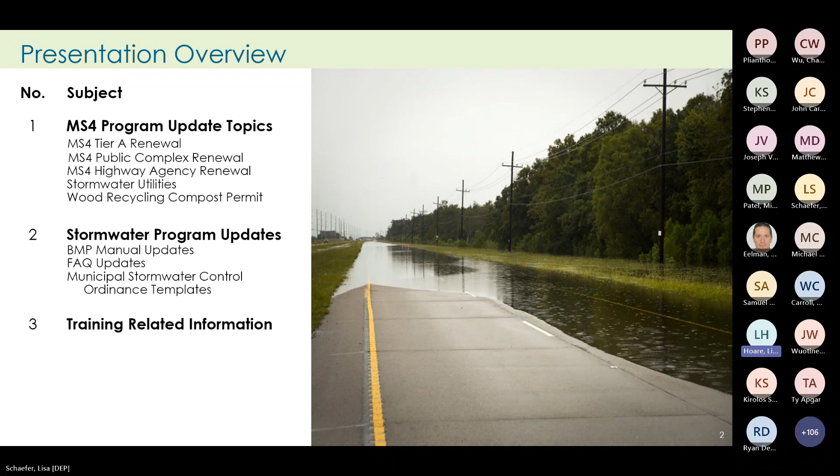Okay, let's get started. Department currently has permittees authorized under 3 types of MS4 permits: Tier A, Public Complex, and Highway Agency. There are currently 557 municipal permittees authorized under the Tier A permit. There are also a few municipalities that are not regulated under the Tier A permit because they do not have an MS4. These municipalities are not permitted under the Tier A because they are entirely sewered by combined sewers and have a CSO permit, or because their storm sewer system is not publicly owned.

The Tier A permit was last renewed in January of 2023. As part of the renewal process, the department addressed EPA's concern to reevaluate Tier A and Tier B designations to determine if any of the town's MS4 systems needed to be authorized under the Tier A permit. We found that all Tier B towns required reassignment due to population density increases in urban areas or due to discharges to impaired waters and/or waters with established TMDLs, which are total maximum daily load.

The other MS4 permits are the Public Complex Permit and the Highway Agency Permit. We currently regulate 71 public complex facilities, which include public colleges, universities, hospitals, and our prisons. The public complex renewal was finalized in January 2024, and with that, 13 additional public complexes were authorized under the permit. There are 33 highway agencies regulated under the Highway Agency Permit, including state and county DOT roads. This includes agencies like the Turnpike Authority, Bridge Commissions, and the Parkway. The permit is currently due to expire at the end of this year, so it is currently in the renewal process and anticipated to be finalized by January 2025.

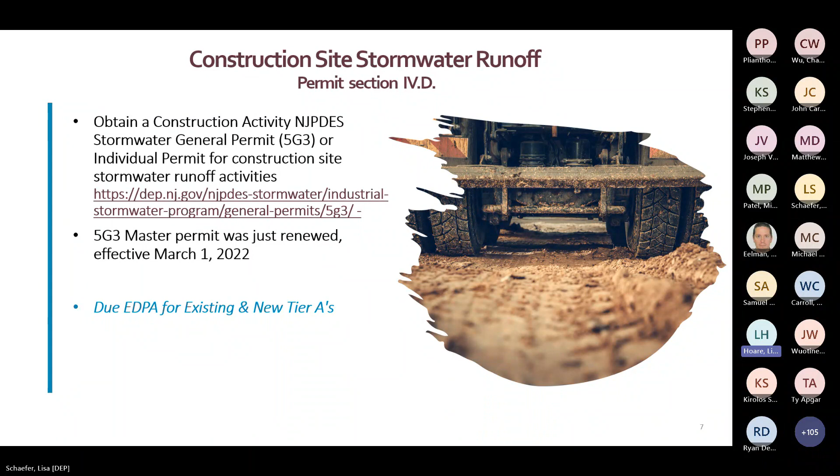There are two minor changes to this condition. First, we clarified the permit language to say the design engineers cannot approve their own designs. Next, for any amendments to the Stormwater Management Rule, training sessions will be necessary for stormwater design reviewers. This is because attendance at this particular training, known as SWMDR, is only required once every 5 years, and we don't want to wait that long to train people on the amendments.

Rule amendment training sessions pursuant to the rule adoption in July of last year were announced by the department on the website and via email to all stormwater program coordinators and people who have attended previous SWMDR courses. There is a completion list posted on the training webpage for all the reviewers who have completed the required rule amendment training. For any future rule amendments, this training requirement will also apply. Attendance is mandatory and must be completed within 1 year of adoption of the amendments to N.J.A.C. 7:8.

We have added 2 new ordinances to the permit and have provided 2 new model ordinances to aid municipalities in the adoption process. The first new one is a privately owned salt storage ordinance requiring owners of private properties and businesses such as malls, shopping centers, etc., to properly store salt and other solid de-icing materials. The next one is a tree removal replacement ordinance to reduce runoff and to promote infiltration. Some towns may already have similar tree ordinances, and if their existing tree ordinance meets the minimum permit requirements, the town will not need to adopt our model. Note, we have completed evaluating the comments submitted on the 2 drafts and have finalized both model ordinances. Both are available on our website.

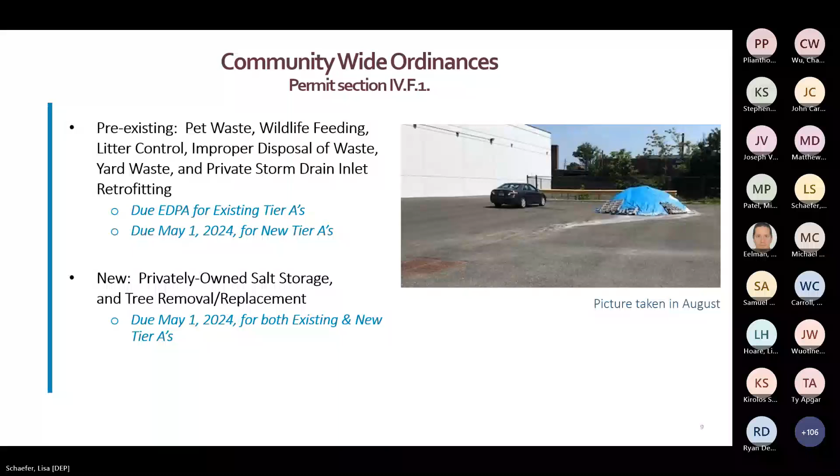There is no change related to labeling inlets. The change here is that all remaining storm inlets that have not yet been retrofitted due to utility work or paving projects must be retrofitted by December 1st, 2027. The entire structure can be replaced with an updated one, or you may attach a bolt-on plate to reduce the size of the vertical openings of the old inlet.

In addition, all newly installed inlets must have a catch basin or other BMP to collect solids. We have also included an exemption for the catch basins on bridges.

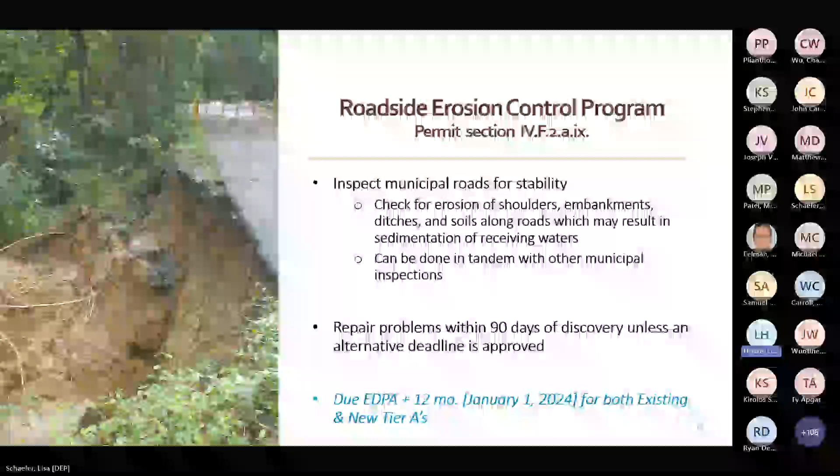This is a condition that was in the 2004 Tier A permit that was removed in the 2009 permit renewal. The reason is that, at the time, it was viewed as a redundancy since municipalities are required to control erosion under the Standards for Soil Erosion and Sediment Control in New Jersey, NJAC 2:90-1. However, those standards only apply to construction sites, not necessarily to existing roadways, and we have received complaints about ongoing roadside erosion in various towns.

The photo shown on this slide was taken by one of our enforcement officers who was investigating an erosion complaint. So, we have reintroduced this condition in the renewal. Erosion checks can be done while performing other stormwater inspections, so you don't need to schedule additional trips. If problems are identified, we allow 3 months to address it unless another time frame is authorized by the department.

We want to clarify and point out that inlet inspections and catch basin inspections are different activities and have different schedules. The condition of storm drain inlets can be observed with a simple drive-by type of inspection and a quick sweep or shovel if the grate is clogged. For this reason, we require that all storm drain inlets are inspected every year.

Catch basins, on the other hand, require additional work. The inspector must get out of the truck to inspect the inside of the catch basins to determine cleaning needs. For the Tier A permit, a minimum of 20% of the total must be addressed every year on a rotating basis so that all catch basins are inspected by the end of the permit cycle.

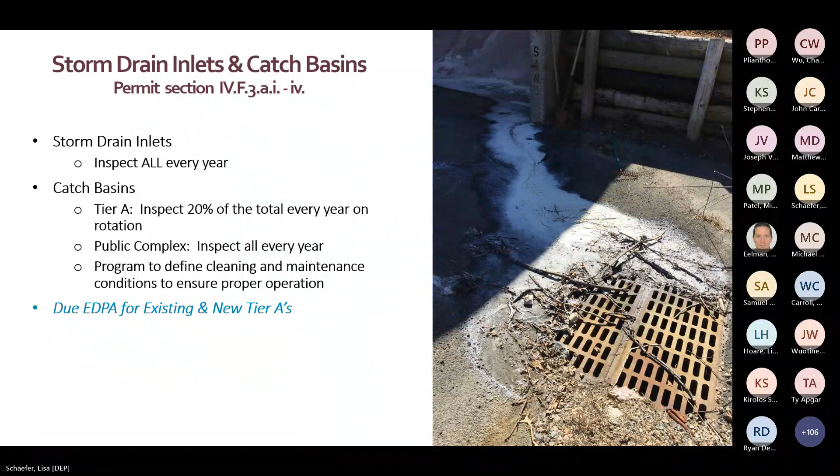This is a clarification to highlight that the permittee is required to properly inspect, clean, operate, and maintain all stormwater management measures. This is a catch-all condition since it refers to all remaining stormwater facilities not mentioned specifically in other permit conditions, such as stormwater management basins and manufactured treatment devices, known as MTDs. This program should define what conditions warrant cleaning, proper operation, and maintenance of any remaining stormwater infrastructure and establish an inspection schedule that is tailored to the permittee's characteristics and resources.

If there is not an approved maintenance plan, the permittees can prepare a retroactive maintenance plan for certain infrastructure or inspect at least 4 times annually and after each rainfall of 1 inch or more. Keep in mind that inspection logs must be maintained.

This condition is for privately owned stormwater facilities. Permittees must have a program to ensure that cleaning and maintenance is performed as per approved maintenance plans. This was also required in previous Tier A and B permits. The private owner operator is responsible for providing documentation to the permittee that the stormwater facilities on their property are inspected annually and maintained according to approved maintenance plans. Operation and maintenance responsibilities may be assigned to commercial property owners, developers, and homeowners associations.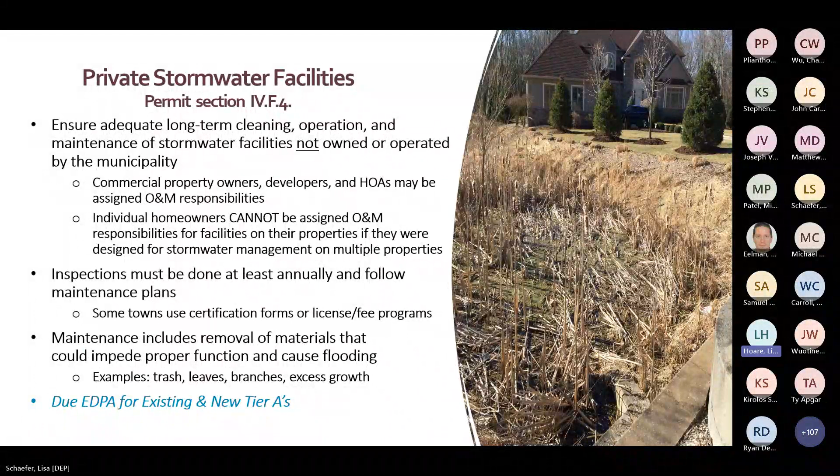However, individual homeowners cannot be assigned these responsibilities for stormwater facilities that were designed to manage stormwater for the surrounding areas. Permittees need to keep an inventory of the location and types of private stormwater facilities, as well as records of inspections, cleaning, maintenance, and repair work, and any problems and enforcement actions that were taken. The location and type of these private facilities will need to be included in the map created for the Watershed Improvement Plan, which we'll cover a little later.

Here you can see a list of the new or modified BMPs for maintenance yards and other ancillary operations. Note, the requirements that were previously included in Attachment E are now in the body of the permit, not in the attachment. All of the BMPs listed here have been modified from the 2018 permit, with the addition of a few new BMPs. For example, the Tier A permit will no longer authorize stormwater discharges from wood chipping or leaf composting activities, as these will be covered under the department's new wood waste recycling and leaf composting general permits.

Some of the other changes include: construction and demolition waste, wood waste, and yard trimmings may be stored on site for up to 6 months, but processing activities are not authorized. Scrap tires should be stored in a covered container or enclosure, but may be covered with a waterproof material on an impervious surface. Inoperable vehicles or equipment may be stored on site, but must be inspected monthly to ensure that no

fluids are leaking. All refuse containers and dumpsters that are stored outside must be covered at all times to prevent exposure to stormwater. If outside, bulk liquid materials must have secondary containment, such as spill containment dikes. Aggregate material, wood chips, and finished leaf compost and construction debris may be stored on site for up to 6 months, but processing activities are not authorized. Cold patch asphalt must be stored in a permanent structure or covered with a waterproof material on an impervious surface.

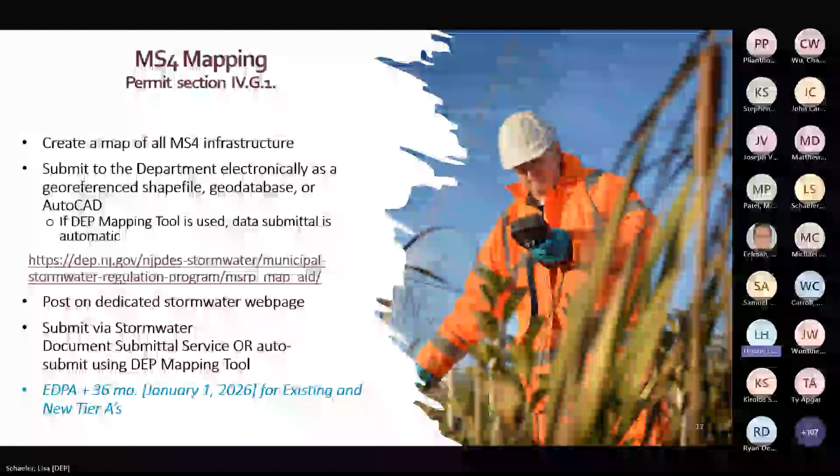Permittees must submit the MS4 infrastructure map electronically to the department by January 1st, 2026. Electronically does not mean a PDF sent via email. Rather, it means submitting georeferenced shapefiles, geodatabases, or AutoCAD files with all other non-applicable data stripped out.

The department has developed a free mapping tool for permittees to use, and we can provide ArcGIS Online licenses for free. Additionally, the tool has been updated to accommodate any additional stormwater facilities and features that are required to be mapped. If the DEP mapping tool is used, data submittal is automatic. Otherwise, the files will need to be uploaded via the online stormwater document submittal service. The MS4 infrastructure map shall also be posted on the permittee's dedicated stormwater webpage when it is complete.

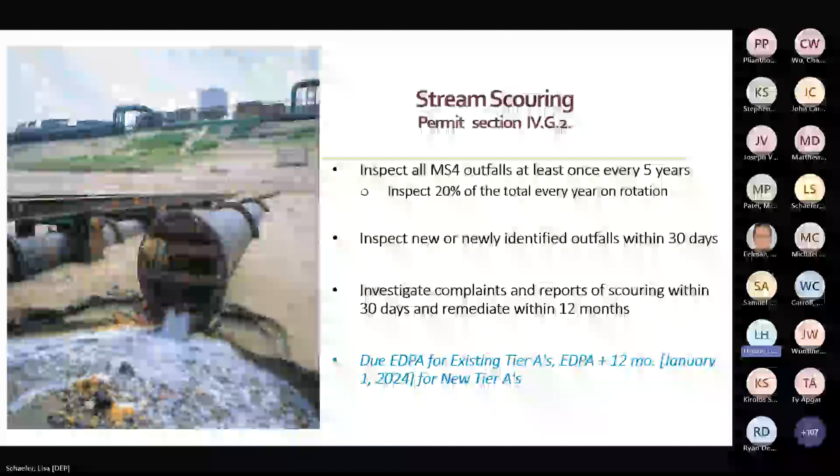Stream scouring inspection has been modified so all MS4 outfalls are to be inspected at least once every 5 years. Permittees must inspect 20% of the total annually on a rotation so that all outfalls have been inspected by the end of the 5-year permit cycle. Note that we broadened the scope of outfalls in the renewal to not just mean outfall pipes, so that will mean open conveyances as well. All new or newly identified outfalls, as well as complaints or reports of scouring, must be inspected within 30 days, and any reports of scouring need to be remediated within 12 months of discovery.

The requirement for illicit discharge detection and elimination inspections has been modified so all MS4 outfalls are inspected for illicit discharge at least once every 5 years. Permittees must inspect 20% of the total annually on a rotation so that all outfalls have been inspected by the end of the 5-year permit cycle. All new or newly identified outfalls, as well as complaints or reports of illicit discharges, must be inspected within 30 days, and any reports of illicit discharges need to be remediated within 12 months of discovery. These inspections can be done in conjunction with the stream scouring inspections.

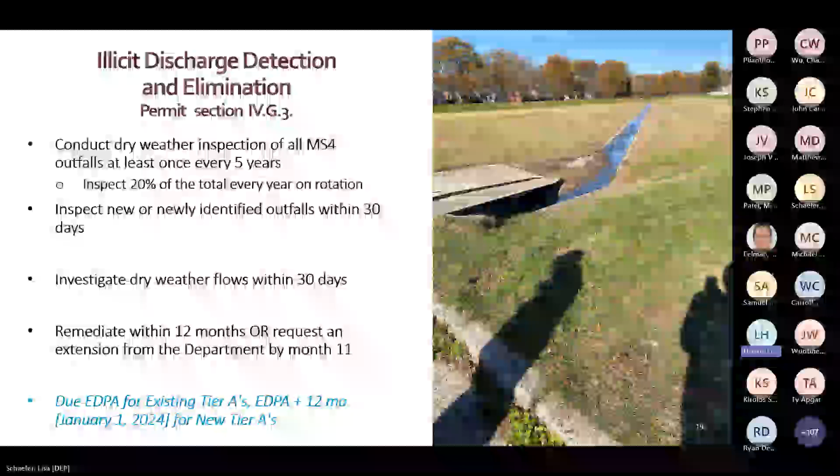There are many water quality impairments and resulting TMDLs that affect waters across the state. Some of these impairments affect fish and aquatic biota, drinking water intakes that supply the water we drink, and even rivers and coastal waters where many of us swim every summer. Harmful algal blooms in many lakes due to water quality impairments are also occurring more frequently in the summer months. Some of these waters have no other discharges into them other than the local MS4s. Therefore, the department requires that each Tier A permittee develop a watershed improvement plan to determine what improvements can be made to reduce their contribution of pollutants that are causing impairments to the state's waters.

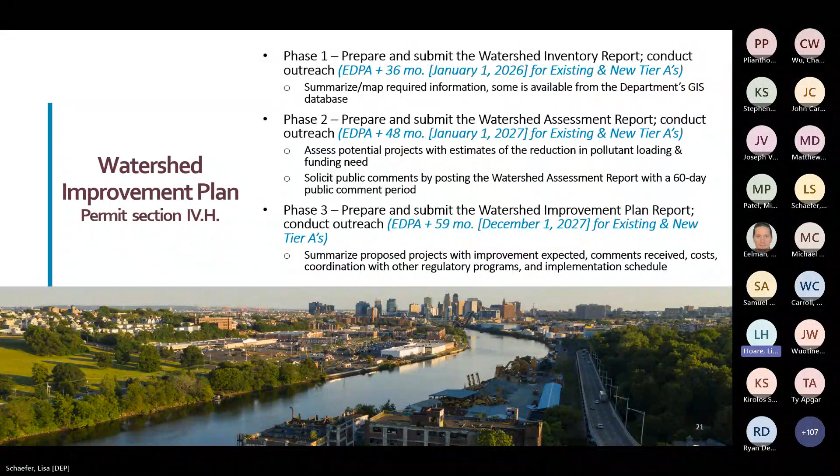The watershed improvement plan will be split into 3 phases with separate due dates. The watershed improvement plan shall be updated when necessary based on the biennial review of revisions to the impairments of the permittee water bodies based on the department's integrated report and newly adopted TMDLs.

Now, for stormwater assistance grants. The department offered a Notice of Funding Availability, NOFA, to assist municipalities in upgrading their MS4 stormwater programs to comply with the requirements of the 2023 Tier A MS4 permit renewal. The department has made $75,000 in aid available to former Tier B permittees to meet the compliance standards of the newly issued Tier A renewal permit.

Eligible applicants had to complete and submit the application form to receive the initial $25,000 disbursement of grant funds. Applicants must submit an acceptable stormwater pollution prevention plan, SPPP, to receive the final $50,000 disbursement of grant funds.

The department has made $25,000 in aid available to original Tier A permittees for the development, update, and maintenance of an MS4 infrastructure map delineating the location of stormwater features owned or operated by the permittee. Eligible applicants had to complete and submit the application form to receive the initial $15,000 disbursement of grant funds. Applicants must then submit an acceptable MS4 infrastructure map to receive the final $10,000 disbursement of grant funds.

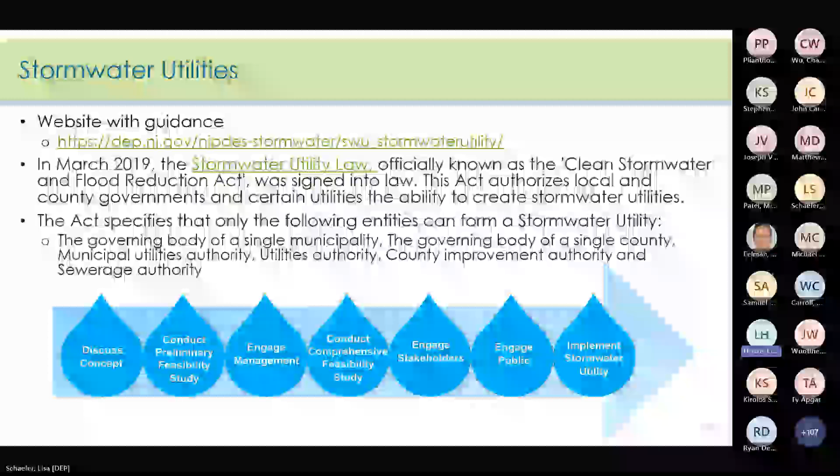Depending on the more unique circumstances in each community, the process to establish a stormwater utility may take up to 5 years or more. There's a lot of information on our website that outlines the steps for establishing a stormwater utility and has many resources on how to do a feasibility study and creating a fee structure. Please reach out to your case manager with questions about stormwater utilities.

Wood waste recycling and leaf composting are federally regulated industrial activities that require a stormwater permit. The 2018 Tier A permit only covered the temporary storage of wood waste and yard trimming materials and resulting stormwater discharges to groundwater and did not authorize discharges to surface water from any processing activity. Through MS4 compliance audits, we found that municipal facilities that performed these activities were not properly managing their stormwater discharge and therefore contributing pollutants to surface and groundwater.

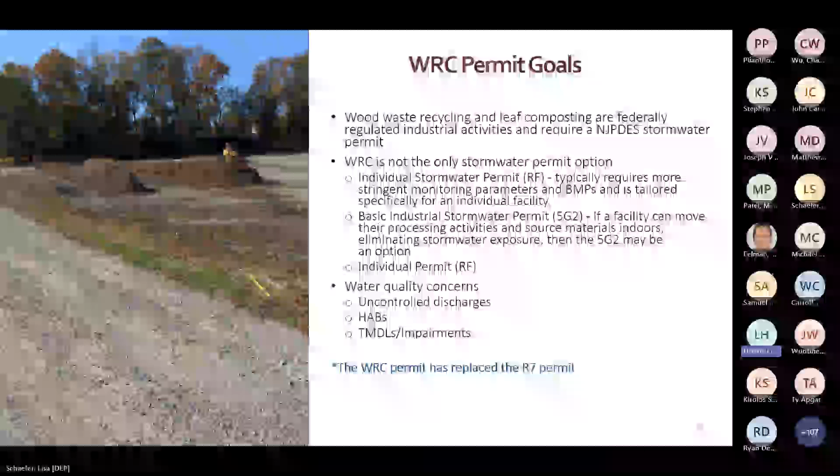On the industrial side, the department's wood recycler's general permit, also known as the R7, expired in 2014 and a renewal was needed. So, in response, the department created the Wood Waste Recycling and Leaf Composting General Permit, or WRC for short. This general permit became effective January 1st, 2023.

This new permit ensures that proper permit coverage is established for stormwater discharges from wood waste recycling activities statewide at both municipal and privately owned facilities. This permit accomplishes this through a combination of BMPs and discharge monitoring to achieve compliance.

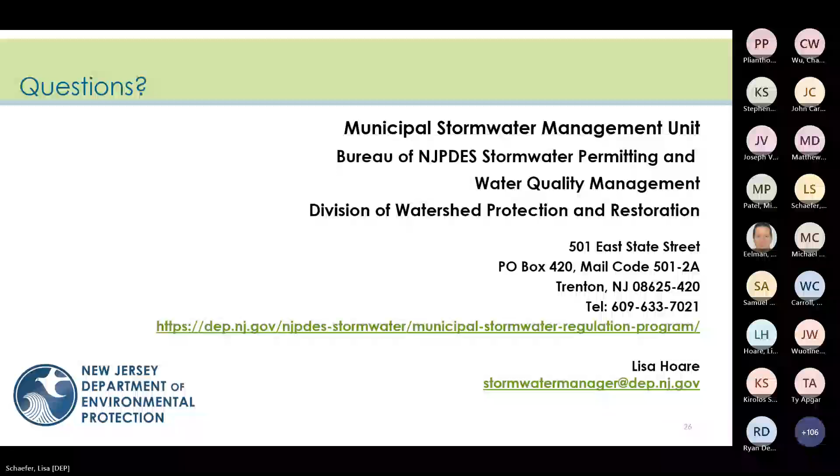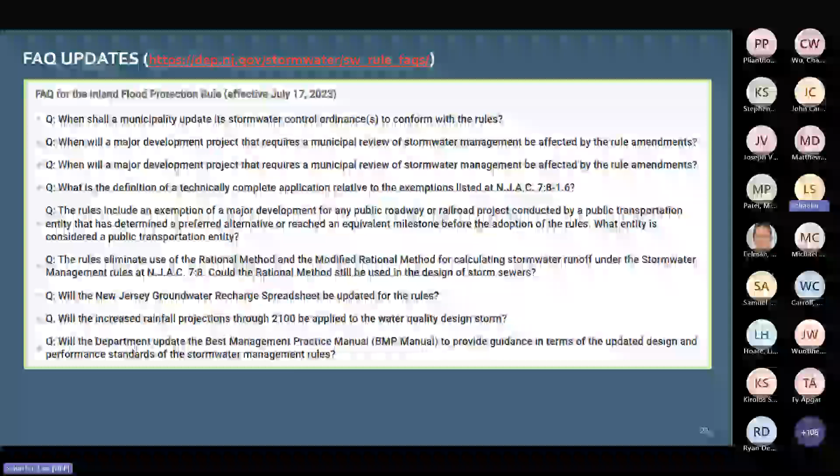Okay, so the FAQs have also been expanded to address various issues, some of which were mentioned on the earlier slides. The newest FAQs are at the bottom of the webpage, but above the blue footer. Just look for the rule adoption date in the header, okay? Obviously, if you click on a question, it will expand to show the answer.

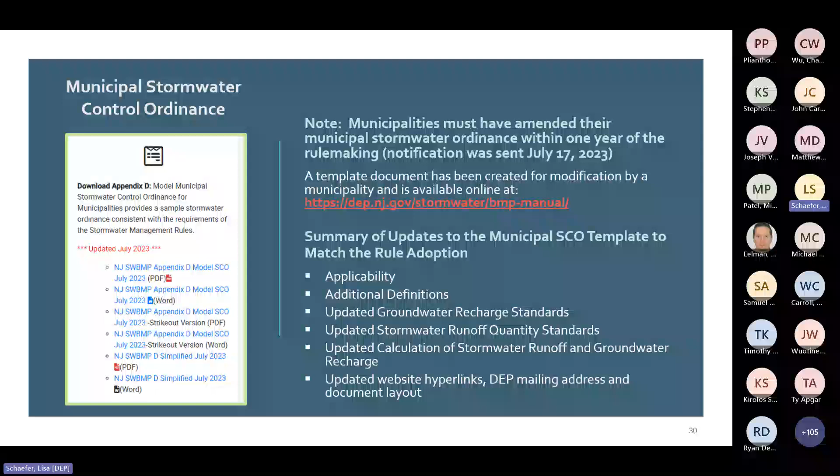Lastly, there's also a simplified version, and this version cites subchapter and section numbers from the stormwater management rules instead of the full text to reduce or eliminate the need for the municipalities to revise their own ordinance when the stormwater management rules are amended. A municipality has to comply with the applicable laws and procedures for the passage and adoption of ordinances pursuant to this simplified version.

Now, municipalities must have amended their municipal stormwater control ordinance within 12 months of written notification by the department of the need for modification and update. That notification was sent on July 17th of 2023, and we are well past the deadline. On the lower part of this slide is a summary of the updates made to the SCO to match the rule adoption. We also updated the hyperlinks throughout the document and cleaned up its appearance.

Okay, so the next course offering will be in the new year, but since you are a reviewer, you are covered for 5 years. Now, you are always encouraged to download the slides for interim sessions of the training and view those videos before your certification expires. And also, don't forget to check the webpage for updated chapters to the manual and other links for rainfall data, other trainings, everything else.